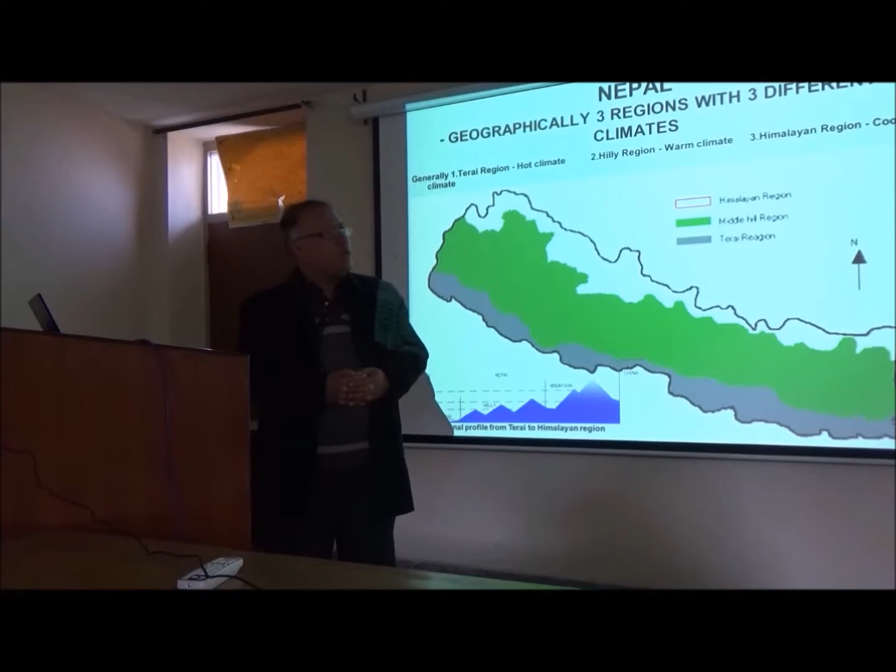Nepal is divided into three geographical regions according to climate. In the south we have the hot climate with the Terai region. In the middle we have the hilly region with warm climate. In the Himalayan area in the north, we have cool climate. So geographically, we divide according to climate.

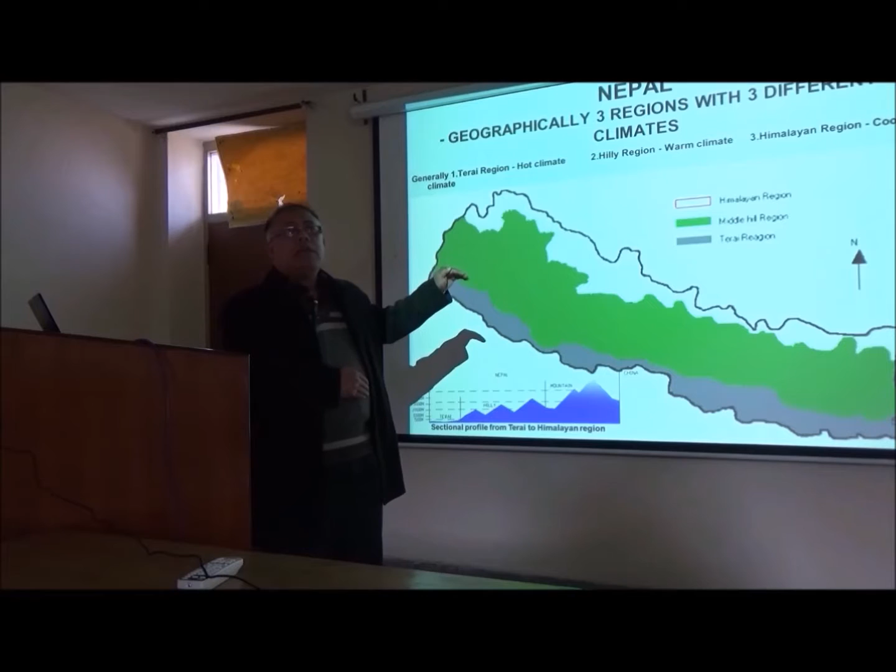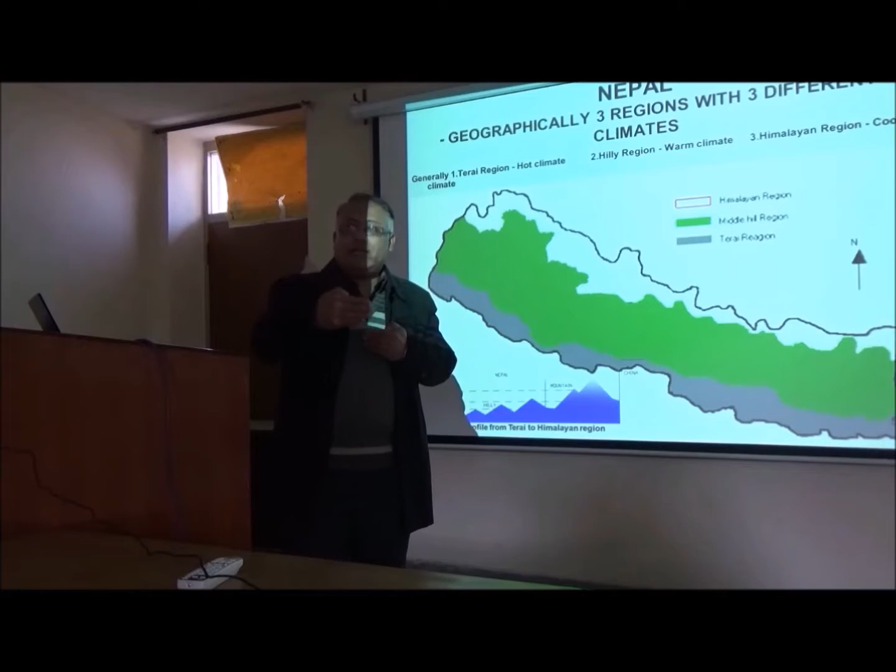If you see the cross section of the country, it's like 150 to 250 kilometers. From the Terai, it's up from 50 to 60 meters from sea level, and it goes up like this to the top of Mount Everest, 8,848 meters.

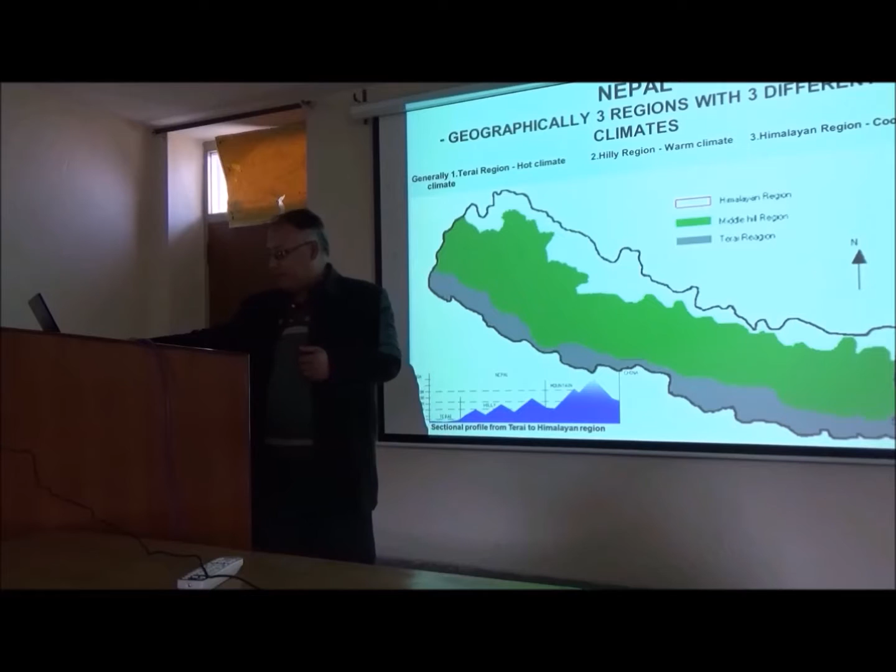So within 150 to 200 kilometers, we have big biodiversity. Different ethnic peoples in Nepal, near to India, near to China, with different cultures, different traditions, different architecture. So we have a composition of different ethnic groups and different architecture, tradition, and culture.

If we see the different regions, Himalayan, hilly, and Terai region, we have different types of buildings. So if we talk about only rural houses, rural buildings, we should concentrate on which area, which region.

In the Himalayan region, you can see in the picture stone buildings with flat roofs. I visited Mustang last time in May - flat roofs, different types of staircases, different settings of rooms. This is the courtyard type of building design.

In the hilly area, especially in Kathmandu, you see big exposed buildings, 2 to 3 to 4 stories, sloped roof with natural material. This is a building in the hilly region in Palpa district, west part of Nepal. This building is made of sun-dried bricks.

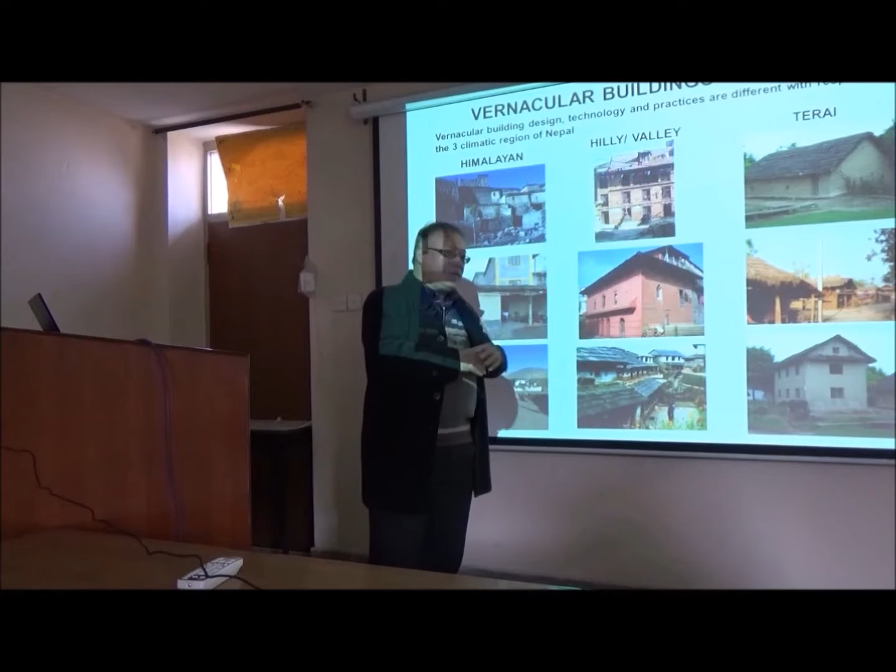This is from the Gurung village, from the west part of Nepal. You can see the roof is slate and the building is like that.

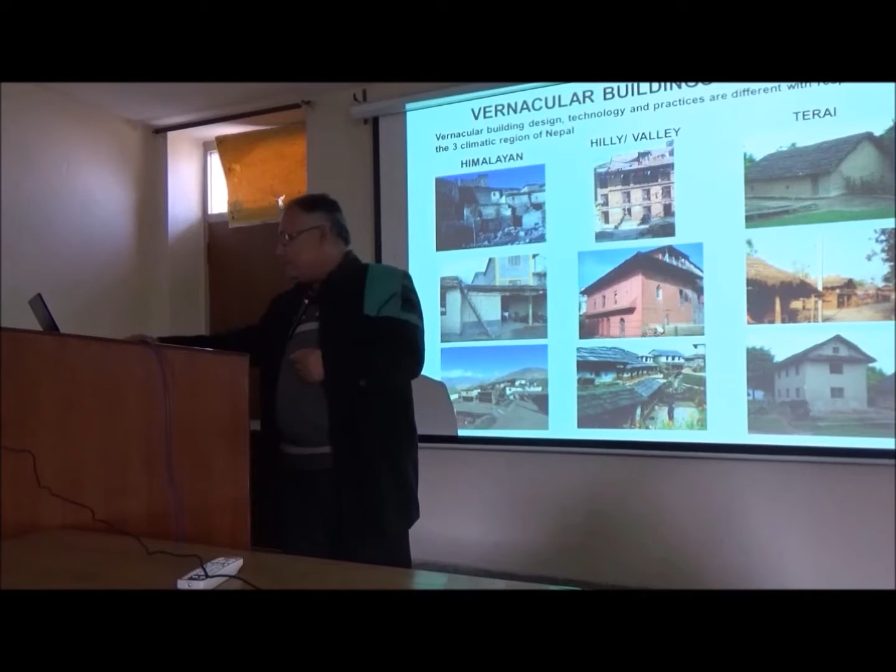And if you see in the Terai region, you can see natural materials like bamboo, straw, mud, etc. This is in the inner Terai side, down south. So we have different types of typology in the buildings according to our region.

So I'm talking today only about the hilly region, rural houses in the hilly region, because we are focusing on the post-earthquake situation. The earthquake affected nearly Kathmandu Valley, only in 13 districts, not all 75 districts. People say all Nepal, all 75 districts were affected by the earthquake, but that's not true. Near Kathmandu Valley, in 13 districts, these districts were affected more.

So I am talking only about the design, technology and green features of rural houses in the hilly region of Nepal. If we see the rural building design in the hilly region, it is nearly 500 to 2100 meters above sea level. It's not very high and not so low, like in the Terai, southern part of Nepal, and the Himalayan area of Nepal.

If we see the rural building design typology, it depends upon the ethnic people of the hilly region. Ethnic people like Newars in Kathmandu Valley, Brahmin and Kshetri from east Mechi zone to west Mahakali zone in the hilly area, Tamang near Kathmandu Valley, Gurung in the west part of Kathmandu Valley, and Magar also in the west part of Kathmandu Valley.

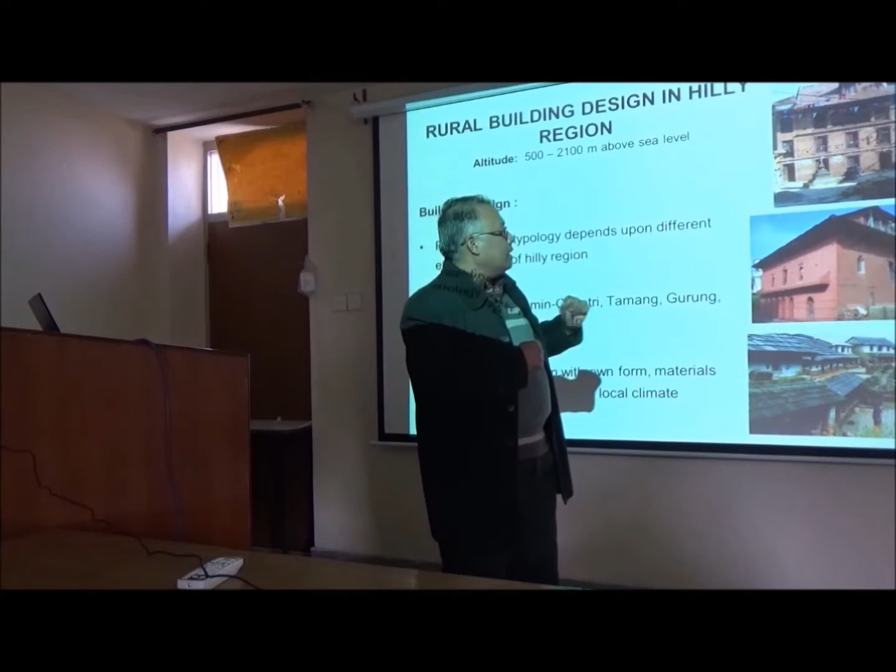So there's a little difference. You can see in the picture, this is the typical traditional building of Kathmandu Valley. This is outside Kathmandu Valley. This is a building from the Gurung village.

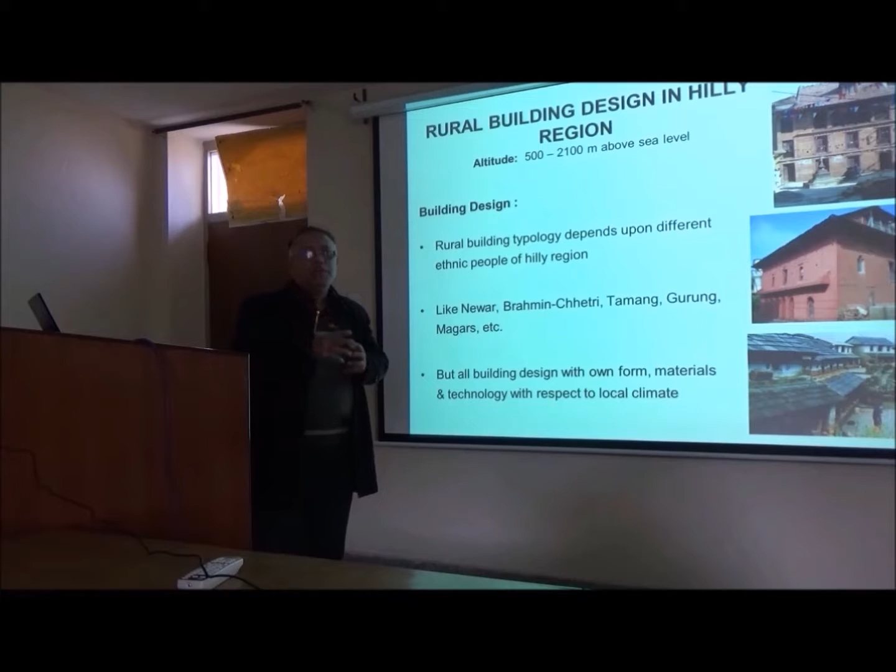So we have a little different design and construction according to ethnicity, according to climate, according to region. In Nepal there are many ethnic groups, but all the building designs have their own form, materials and technology with respect to the local climate, local material, and local people.

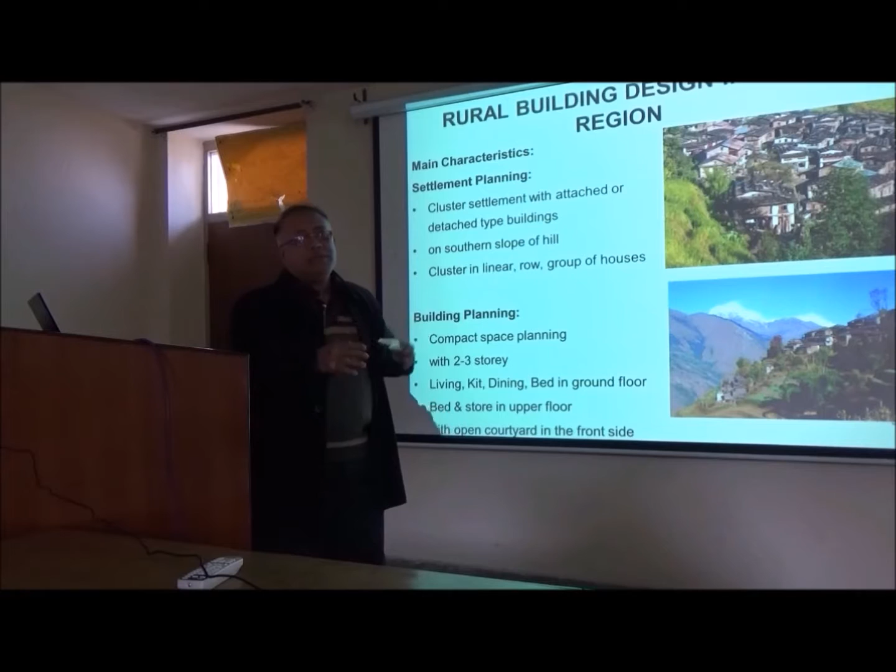If we see the rural building design in hilly regions, the main characteristics of the settlement and building pattern show cluster settlements with attached or detached type buildings. You can see in this picture one of the villages in a hilly area. In the Gurung Magar village, the cluster is grouped very tightly together, but in Brahmin and Kshetri villages, they are a little bit scattered.

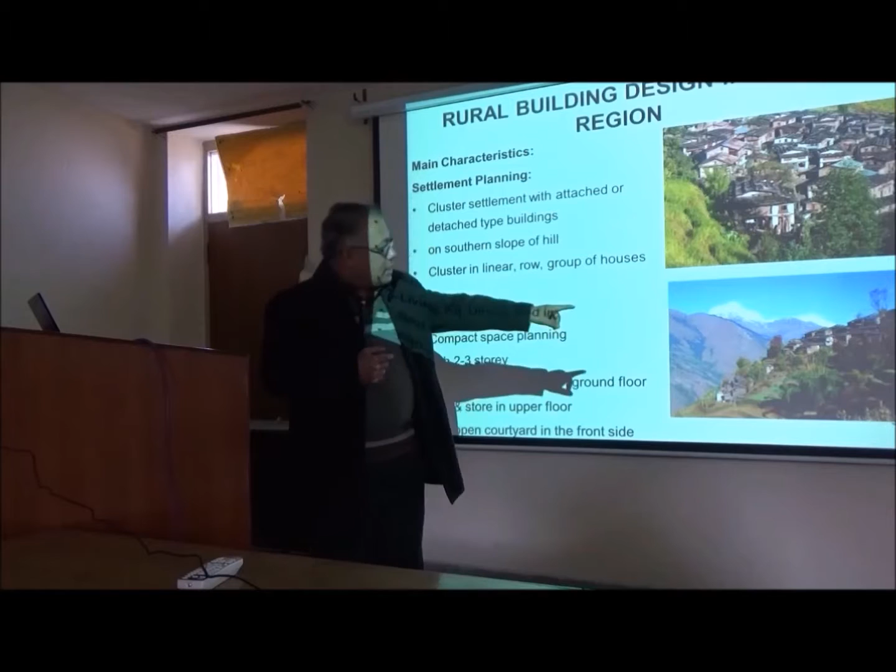They are also in groups, but a little scattered, not like this. You can see in this picture that all the villages are located in the south part of the hill to take sunlight. This is the cluster pattern. Some villages are linear, some are in a row, some are grouped. So we see different settlements according to location, site, and ethnic group in the hilly area.

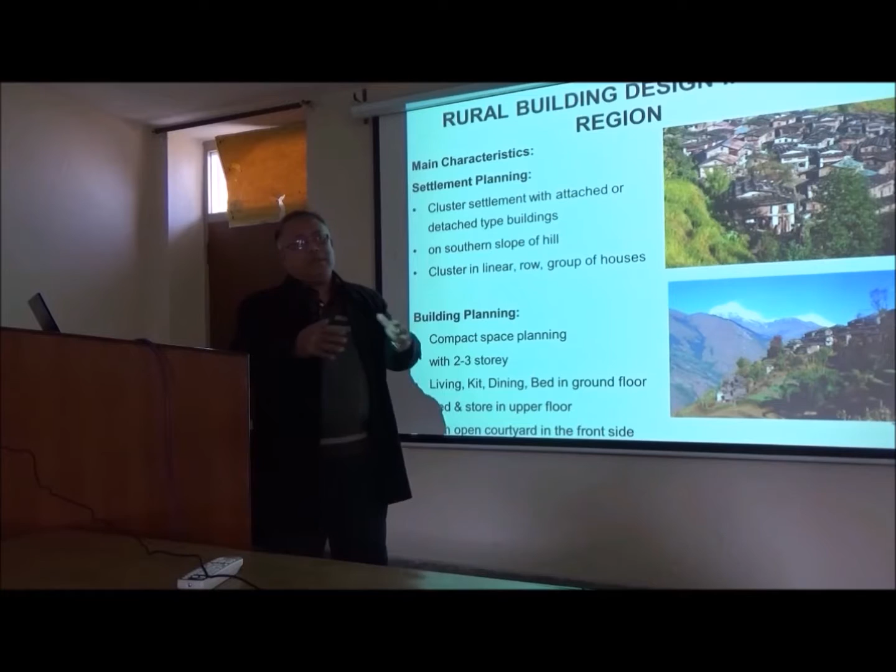In building planning, the hilly area is a little bit cold in winter and warm in summer, but most of the time it is colder, not as cold as in the USA, but colder than the Terai region, colder than the plain region. So we have compact space planning with 2 to 3 stories. Maybe some people have 2 floors, and richer people in the village have 3-story buildings.

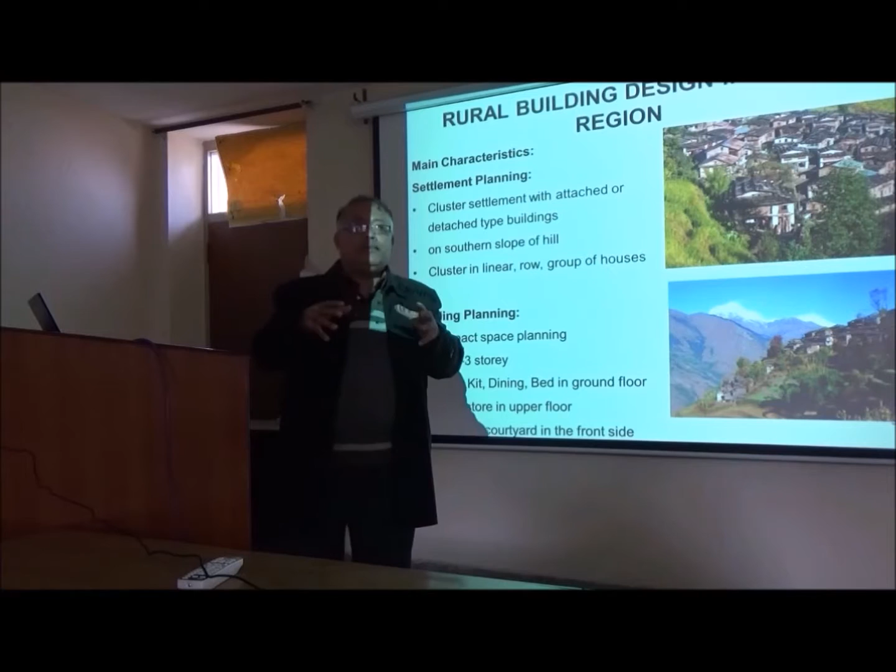So the living room, kitchen, dining, and bedroom are on the ground floor, and they have bedroom and storeroom on the upper floor, with an open courtyard in front. Most people engage in activities in front of the building. They have open space, a courtyard. When people come from other families or neighbors, they talk in the courtyard, not inside. Okay, this is a little bit about the design in rural areas.

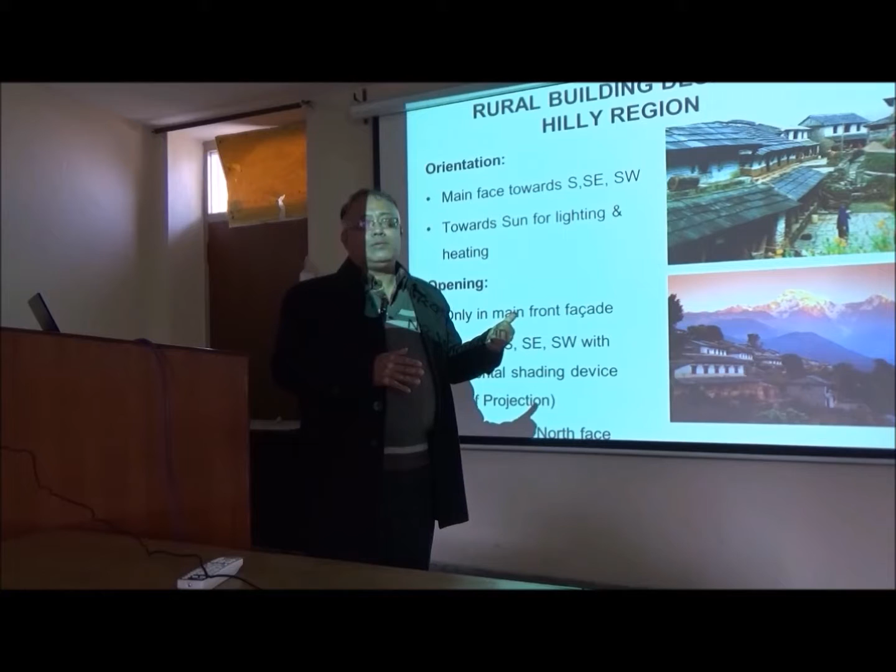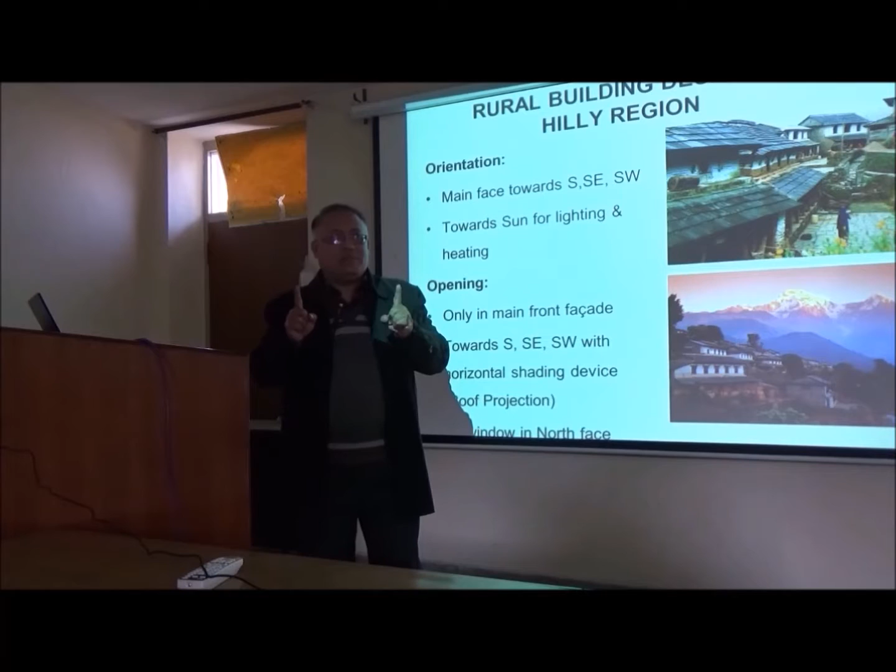If we see the orientation of the building, the main facade always faces south, southeast, or southwest, toward the sun, because all buildings depend upon solar energy. So we say this is passive building, passive solar architecture. The building already faces this way - you cannot see windows in the north part, in Nepal, in the hilly region, in the mountain region, only small windows in the south, but all for lighting and heating purposes.

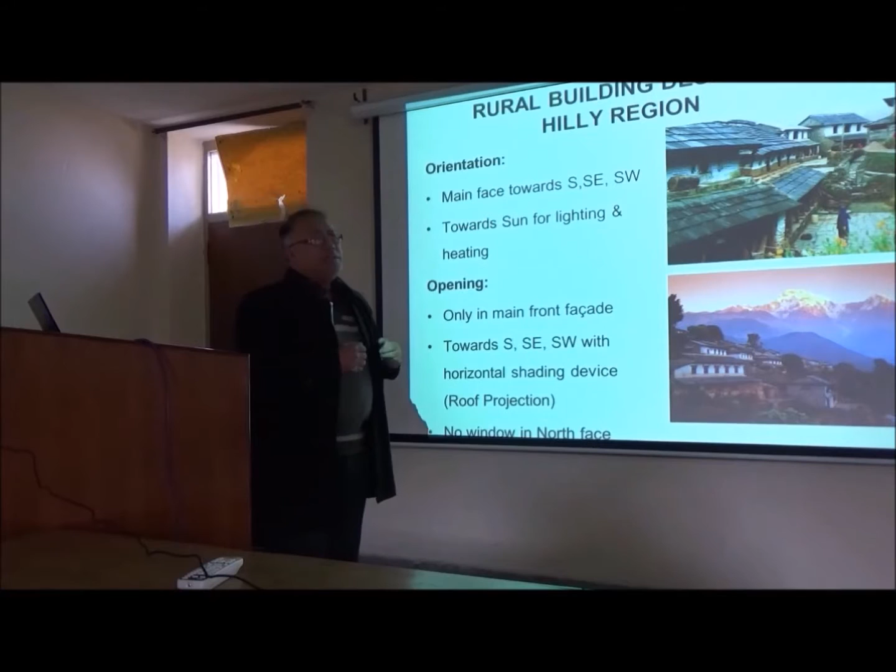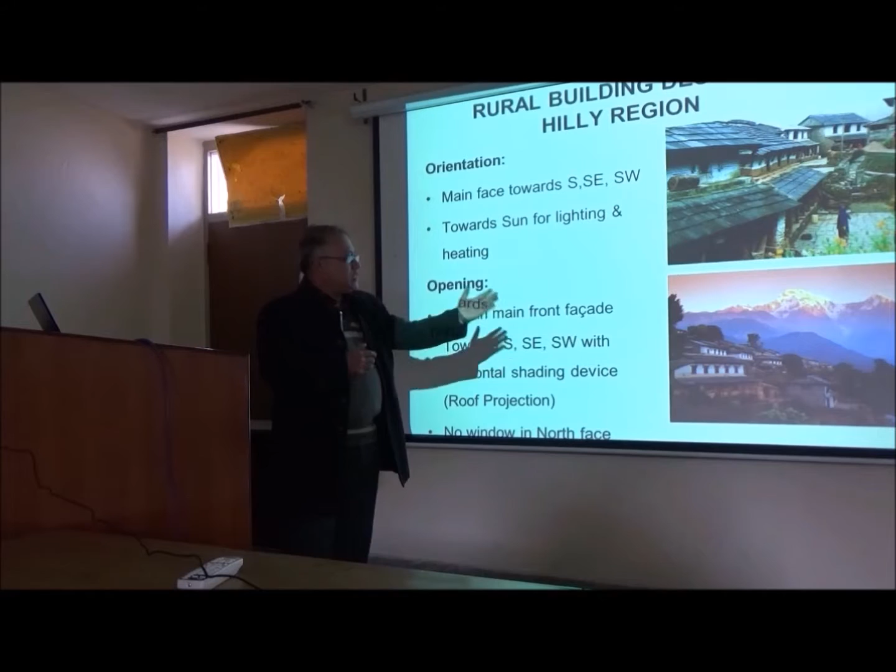This building does not have mechanical ventilation like in the USA or Japan - it's not closed. We always open windows. We have cross ventilation, free ventilated buildings. But in this building we don't need cross ventilation, so we have openings in only one orientation, on one side. You can see in all buildings the openings are only in the main front facade toward south, southeast, or southwest, depending on the location of the building.

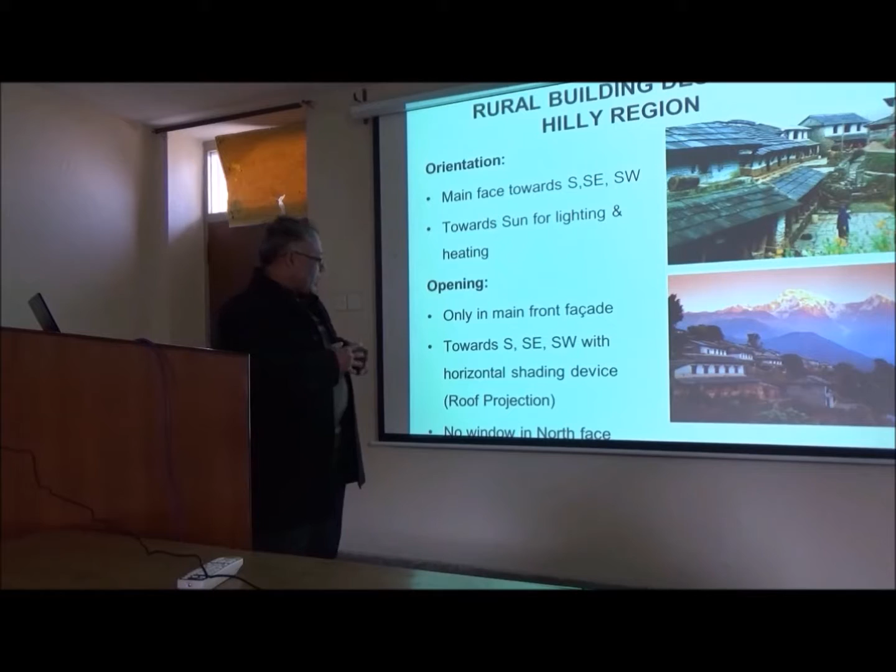And the building always has a horizontal projection of a slope roof. This slope roof will cut off the rain in the monsoon season of June, July, August, as well as the sunlight in summer. You can see some sun-shading devices like that, because in June, July, August we have monsoon season, so the wall and window should be protected from sunlight as well as rainfall. So we cannot see windows in the north part - that is specific to all buildings, all kinds of buildings, in all ethnic groups.

Regarding rural building material and technology, all materials can be found locally - natural materials like stone. Some parts use brick, but not much, and it's sun-dried brick; most buildings have sun-dried brick and timber, which is also locally available. Mud can be found near the site, near the village. Surkhi is the powder of brick used for mortar to join stone or for plastering, and lime is sometimes used - especially if you go to Bhaktapur now, you can see lime and surkhi mortar used in temples and palaces, in high-class buildings.

Otherwise, in local buildings they use only mud. All buildings have thick walls, minimum 30 centimeters, maximum 45, and some buildings have walls up to 60 centimeters thick. So we say these are massive walls, and they attract sunlight.

We say it is the thick wall that works as the thermal mass, because it traps the sunlight, warms, and radiates the heat inside. So if we see the floor height, we check there is very less height in the hilly area.

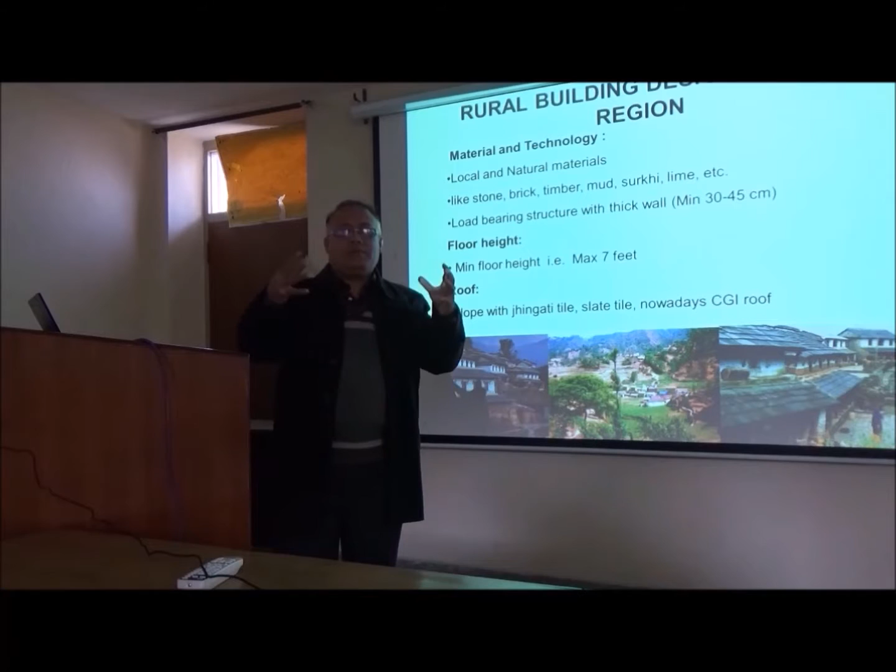In building, maximum 7 feet, because it's cold climate. If you go everywhere, planning is compact and height is less to conserve heat energy. If volume of the building room is high, then you need more energy to heat. So in every part of the world, I saw in Japan and USA also much more compact planning to conserve heat energy, to use less heat energy by active or passive system.

So we have also the same. The roof is sloped with maybe jhingati or slate tile. Nowadays, after earthquake, most reconstructed buildings use galvanized iron corrugated CGI roof. I am very against the CGI roof because it is not climate responsive.

Because when it's summer, it cools; when it's winter, it warms. But in the CGI roof, the climate is opposite: in summer the temperature goes more than outside, in winter also. So I always say that if you use CGI roof, use insulated CGI roof with insulation.

But in the rural area, people do not think about insulation. They just put the CGI roof, that is what they are doing now. Otherwise, we have the thick roof to protect heat from outside in summer and conserve heat in winter.

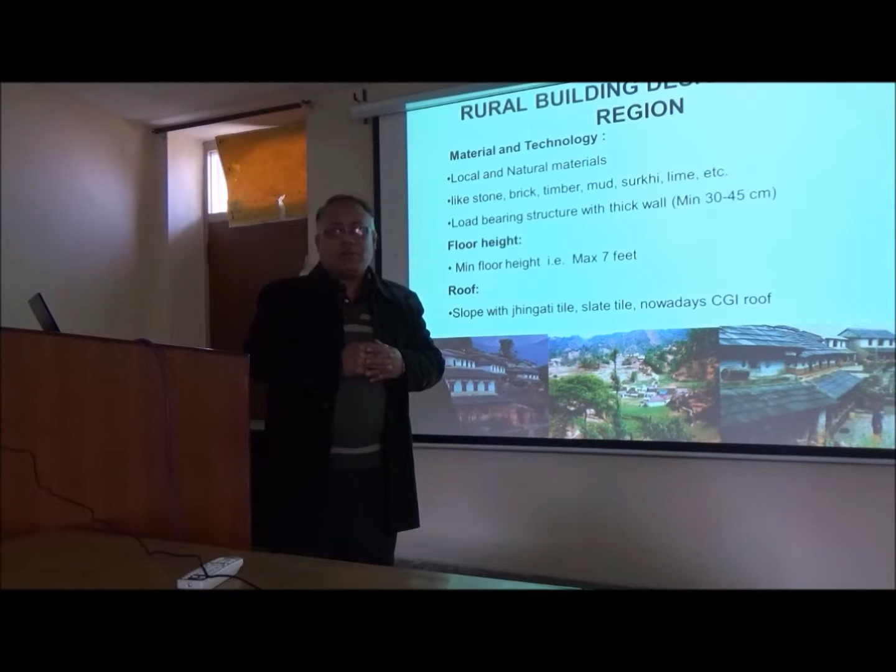So if you see the green features of the rural building, as we say green, it must be environmental benefit. If you check this, all houses are eco-friendly because they use only locally available green materials. They will not use transported material from long distance. They cannot afford it; they use brick if available locally.

If brick is not available, they use stone. This is sun-dried brick used in Palpa district. Other buildings use either brick or stone, and mud mortar, mud plaster, clay tile, timber, etc. This material produces less embodied energy compared to modern materials like cement, reinforcement, concrete, etc.

So less carbon emission material compared to modern building materials. This material does not need to be transported from long distance. That is why it has environmental benefit.

So we save the environment if we use local, traditional material. We have also number 2, social benefit. People think that in Kathmandu or outside the Kathmandu Valley, especially old people say this traditional building has good thermal performance compared to modern building.

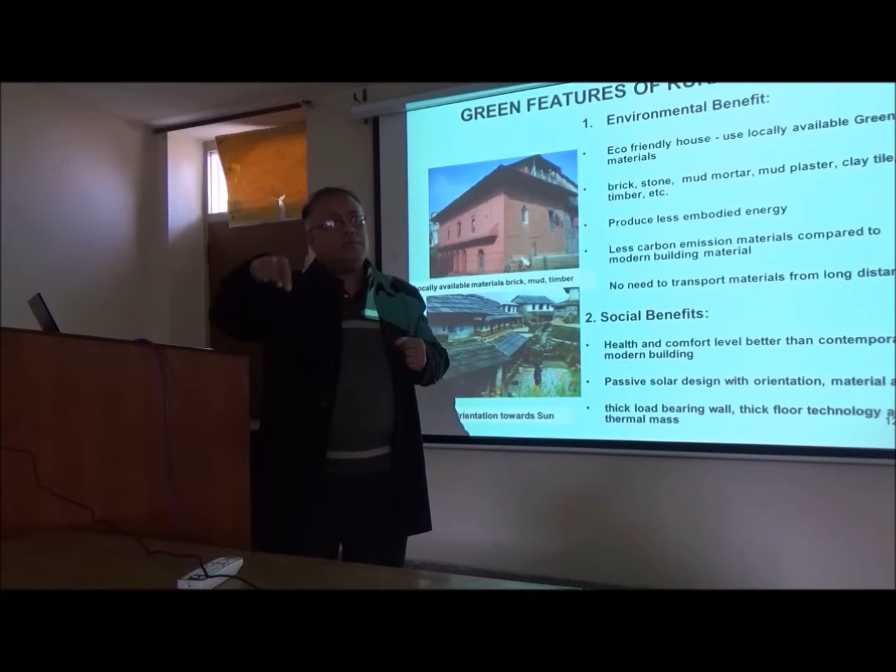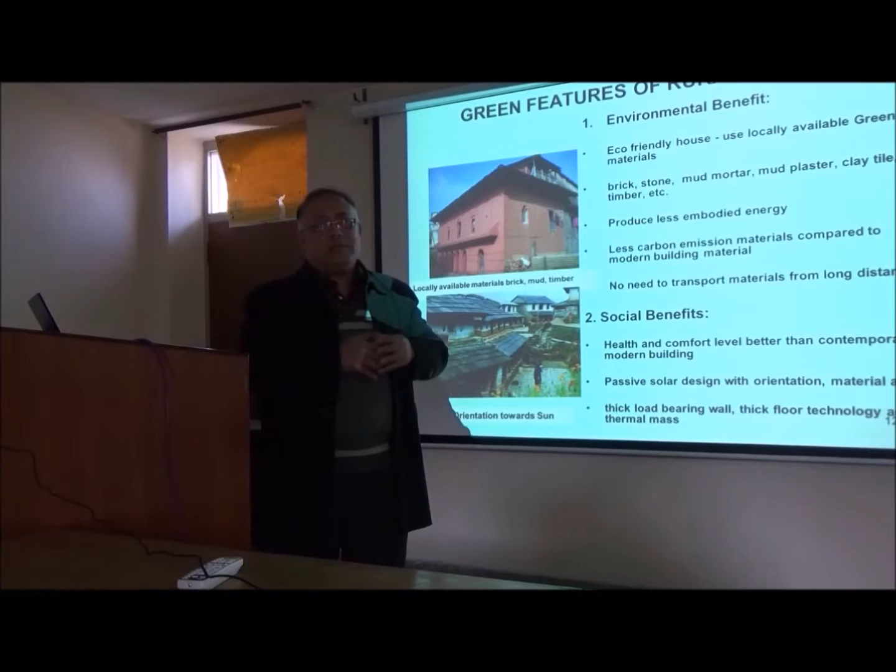People go into the big hotel, they go inside and they cannot sit comfortably. So they came back to the traditional building, and they can sit in the traditional building compared to the modern building. So this is the failure rate in the contemporary buildings, especially hotels in Mustang, in Jomsom, and in different villages near the trekking route. That is the observation when I went and got it, as I mentioned, this is my research.

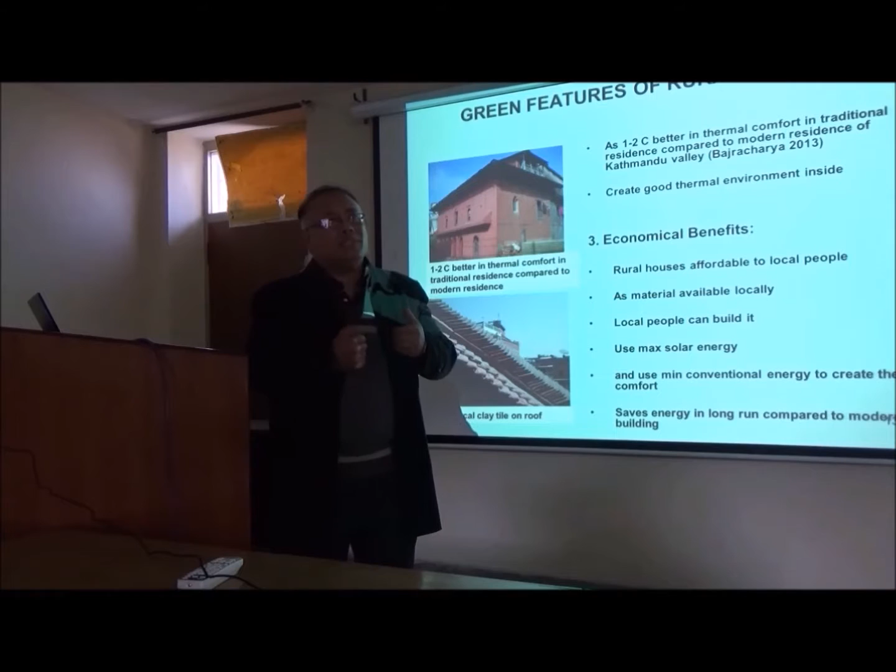This building creates a good thermal environment inside. Nepalese people do not warm their buildings. Last time I had a professor from Tibet University, and we went to Pokhara, Kathmandu and different parts. They said that in Tibet, Lhasa, they now come on vacation because it is very cool there. They came here in December and they said, do you feel okay? For us it's like summer outside. But when they went to the hotel, they said it felt very cold. I asked them why, since you are in Lhasa where the temperature is lower than here. But they told me, we warm our house. In your country, in this hotel, you don't have a warming system, so we feel a little cold. So that is the problem.

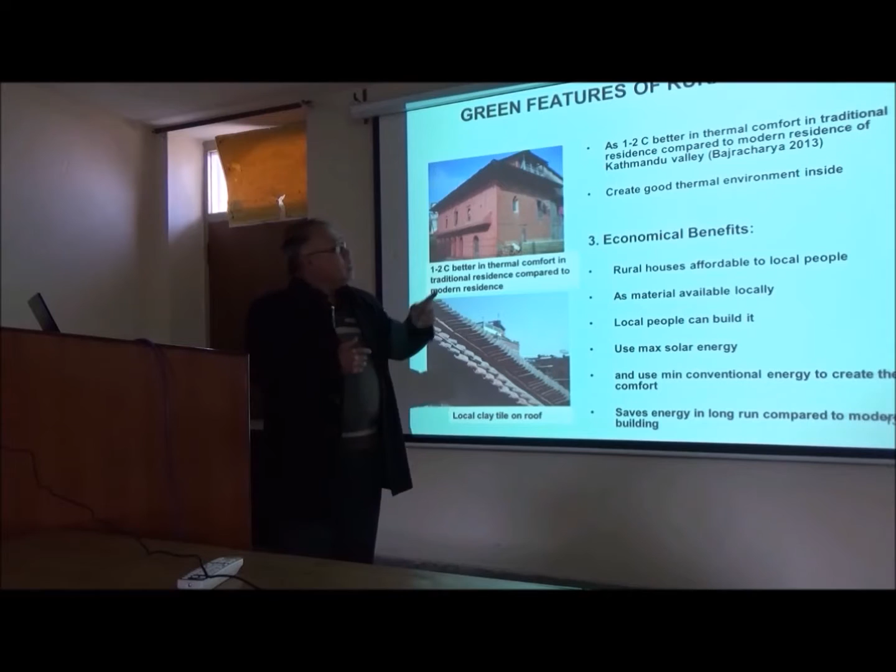Heating, but with this type of building, if you heat it - we don't normally heat it, but if you heat it a little, it warms up. In Mustang also, they use fire, but it doesn't need to run 24 hours, it only needs 3 to 4 hours. Then the heat is generated and the thermal mass absorbs heat and it warms up very fast.

The next point is that this building is green because it also has economical benefits. Like this building, people can afford it. They cannot afford modern materials like cement, concrete, or reinforcement bars, which need to be transported from long distances. In rural areas the transportation cost is very high compared to Kathmandu Valley. So the material is locally available, and people can build this building with their own knowledge.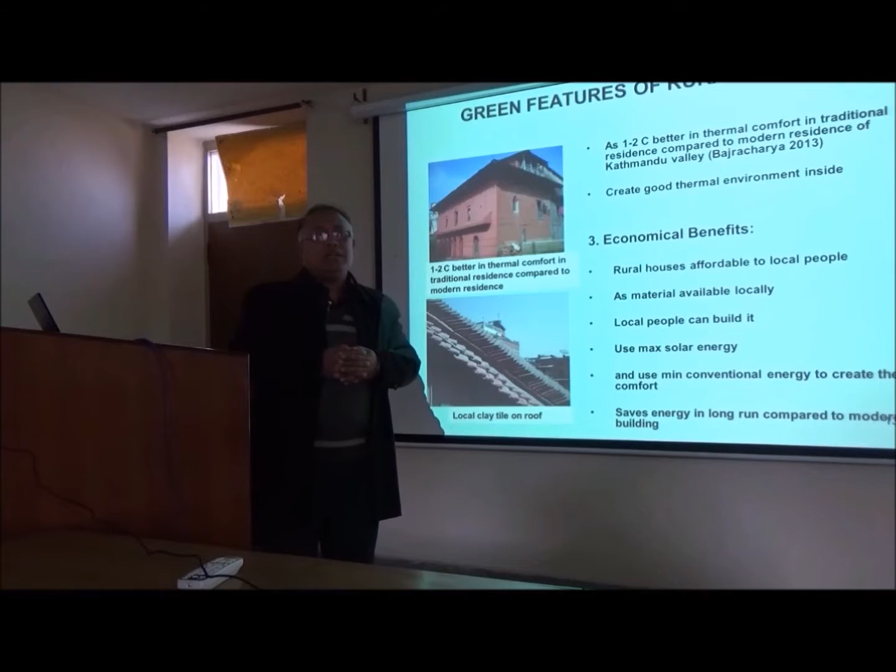So this building typology orients to the south and builds with less floor height. They use maximum solar energy, and use less conventional energy for heating, by petrol, diesel, etc., to create thermal comfort. That means they save energy for heating and cooling. I think for cooling they don't need any energy in summer in these buildings.

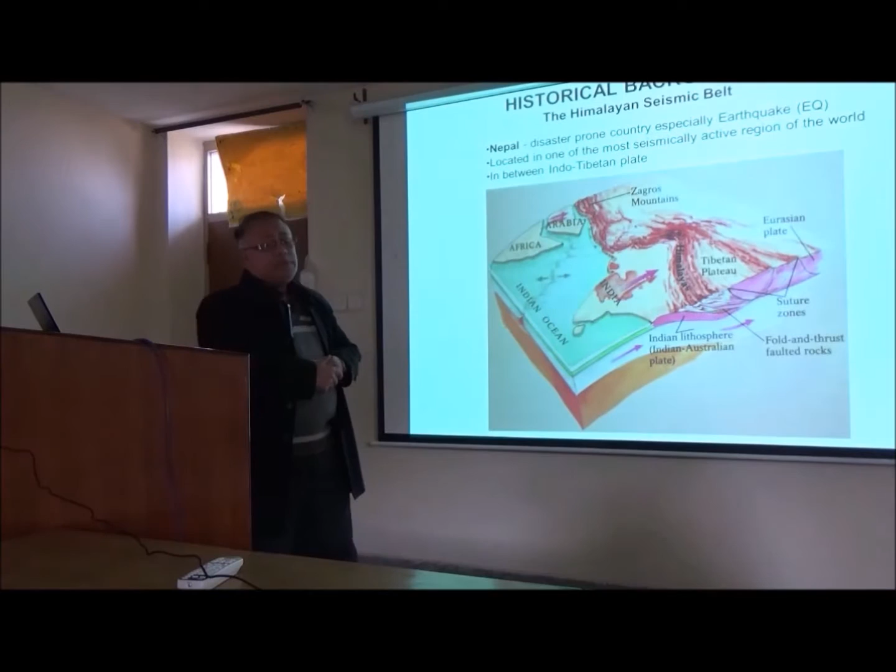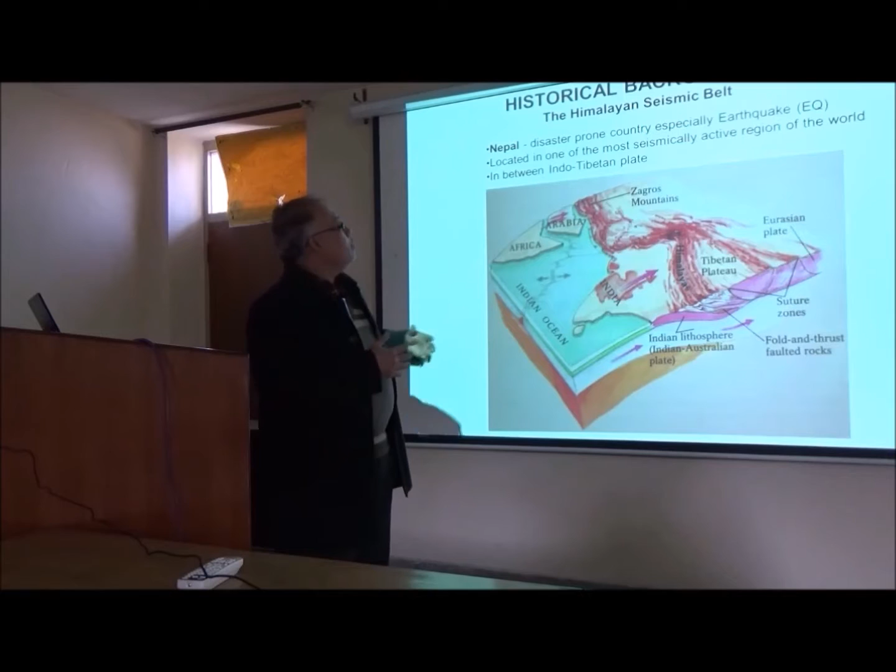If we look at the earthquake's historic background, the Himalayan region is what we call the Himalayan seismic belt, because on these two sides, the Indian plate and the Tibetan plate always have different activities. So we are one of the most seismically active regions in the world. Seismic experts say this is in the 5th zone of the world. It lies between the Indo-Tibetan plates, which always have geological problems between them. So Nepal lies here - people also say we have many mountains, the Himalayas, because of this Indo-Tibetan plate.

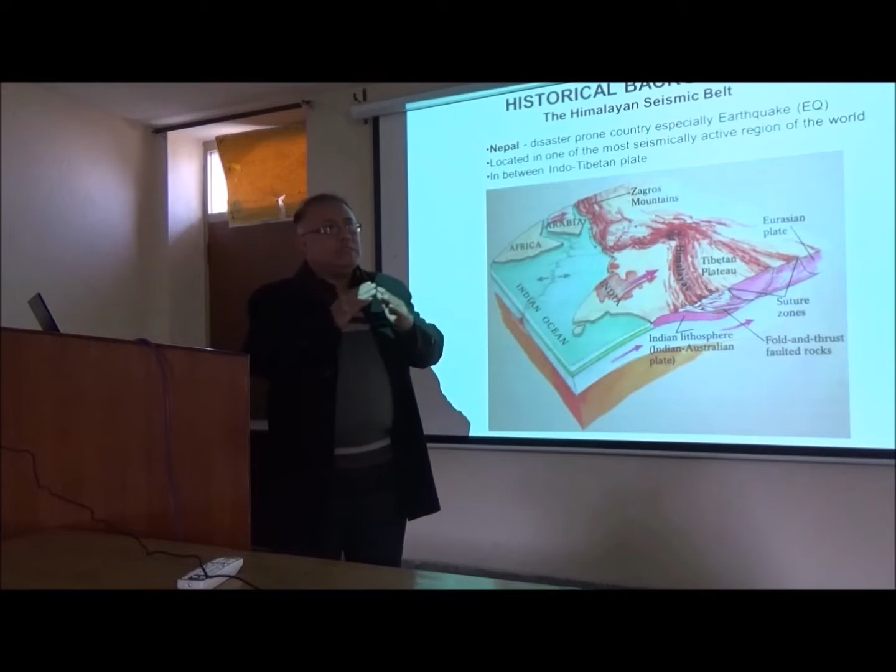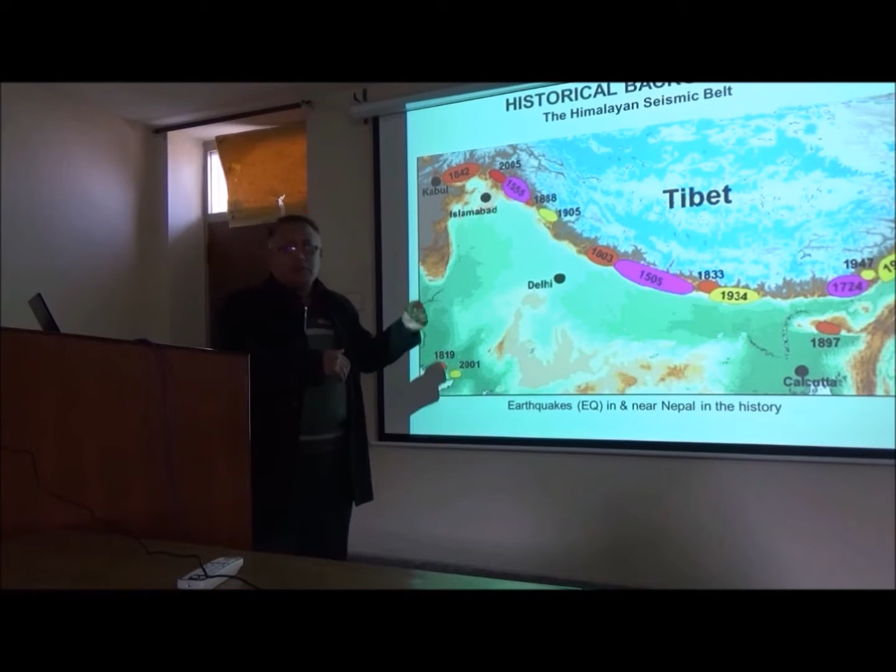If we go back to the historic background, this is India, this is Tibet, China, across different time periods. We have had different types of earthquakes in and near Nepal. This data is from our ministry, and this is data from Wikipedia. If we go back to the 13th century, we had also a big earthquake, but we don't know its magnitude. But based on our data, nearly every 100 years we have an 8 Richter scale earthquake, and nearly every 50 years we have a 5 to 6 Richter scale earthquake in Nepal.

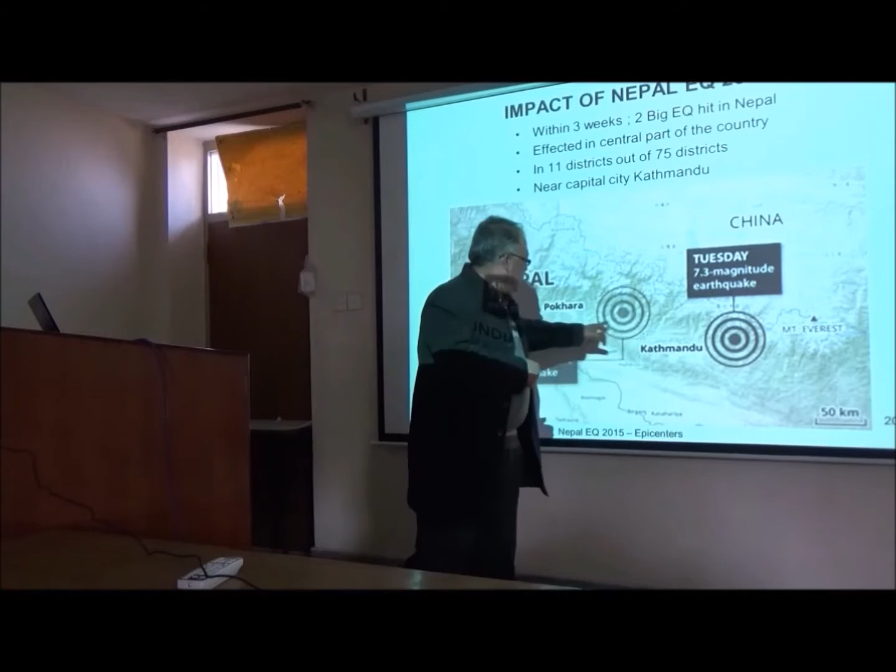So within 3 weeks, we had 2 big earthquakes. This affected especially Kathmandu and Pokhara. The first one was from Barpak, the west part of Kathmandu, and the second from Sindhupalchok. These 2 earthquakes affected only 11 districts out of 75 districts in Nepal.

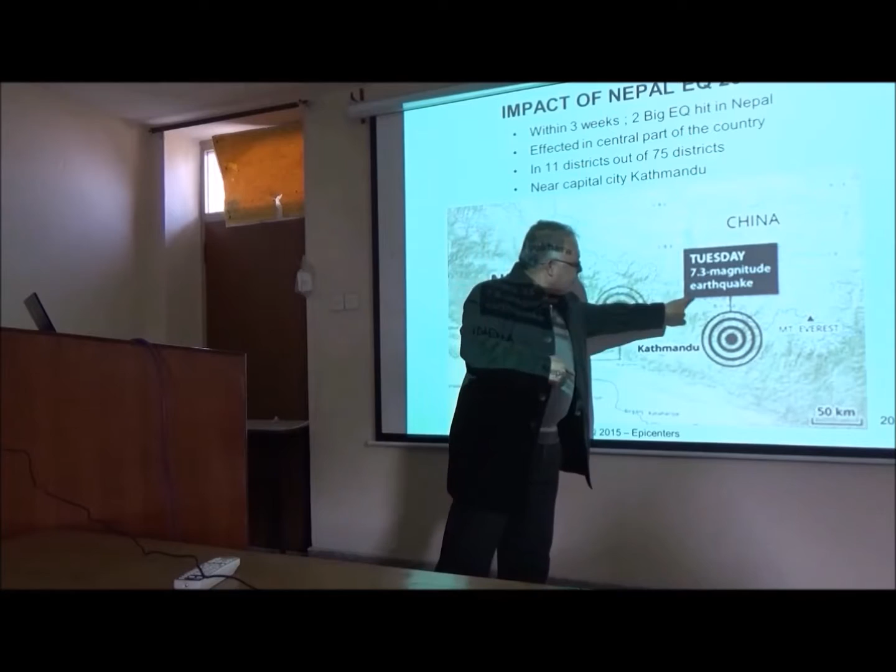I was in Pokhara when the first earthquake hit, but I didn't feel it so much there. When I came back to Kathmandu after 2 days, many aftershocks were happening, so there was scarcity. Most of the earthquake damage and affected area was near Kathmandu Valley.

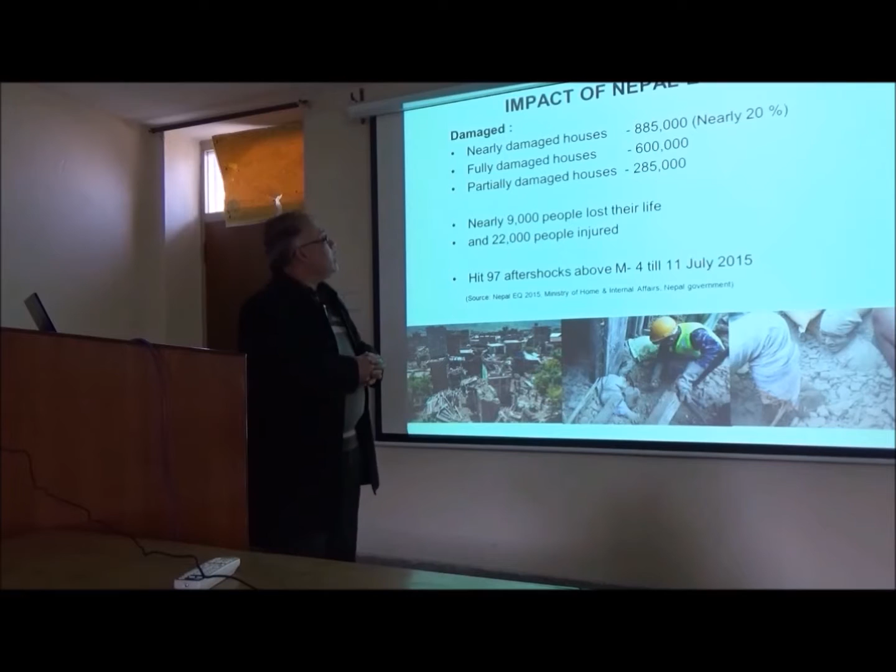According to our Home Ministry, nearly 885,000 houses were damaged - that's 20% of the total households in Nepal. Fully damaged houses numbered 600,000, and partially damaged houses numbered 285,000. Nearly 9,000 people lost their lives, and 22,000 people were injured. There were 97 aftershocks above magnitude 4 recorded until 11 July 2015.

So these are the pictures after the earthquake.

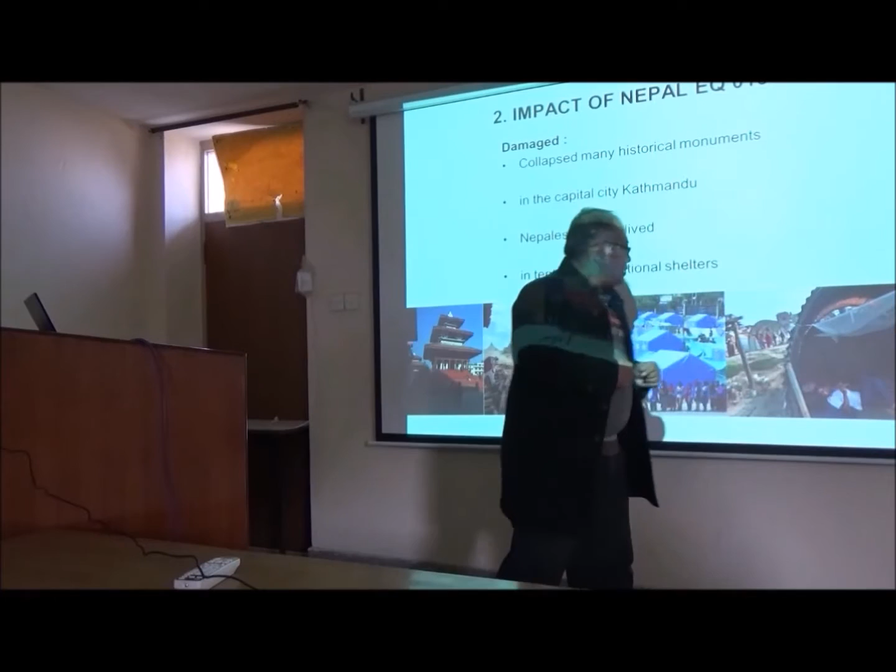Many historical monuments collapsed in the capital city, Kathmandu. Many Nepalese people lived in tents - this is a tent in Tundikhel, in the center of Kathmandu Valley. Also people lived in transitional shelters like this, in different parts of the country.

This is the historical damaged monument in Swayambhu. This is the palace in Kathmandu Darbar Square. This is Patan Darbar Square. This is the institutional building, the university building of Tribhuvan University - the main building of Tribhuvan collapsed.

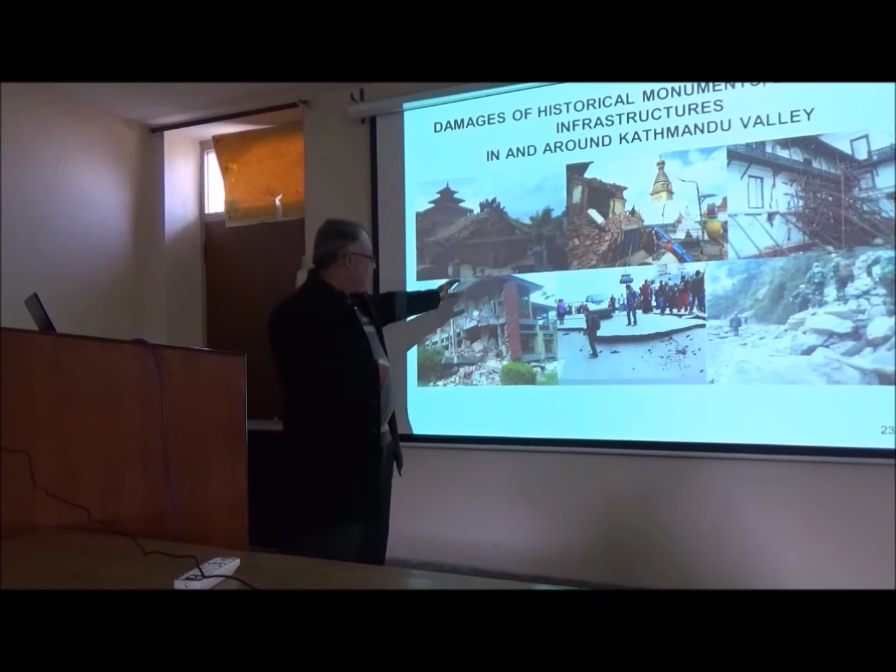This is the highway, in the rural area. We also had landslides and damaged infrastructure in and around Kathmandu Valley.

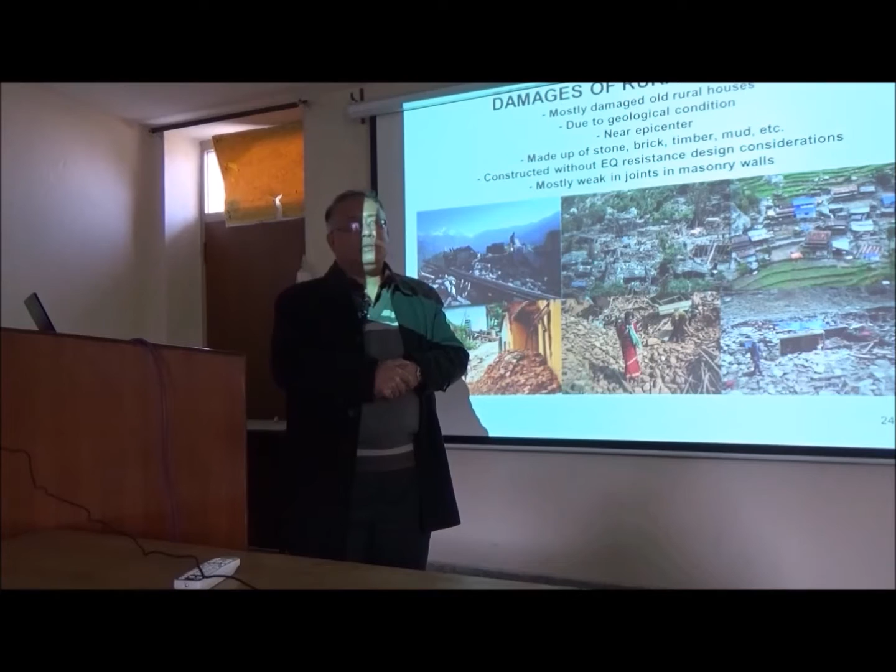Most of the damage was in rural shelters. If you look at the data, in Kathmandu nearly 2,000 people lost their lives. In Sindhupalchok district, also about the same number. But if you compare the population, it varies by 10 times.

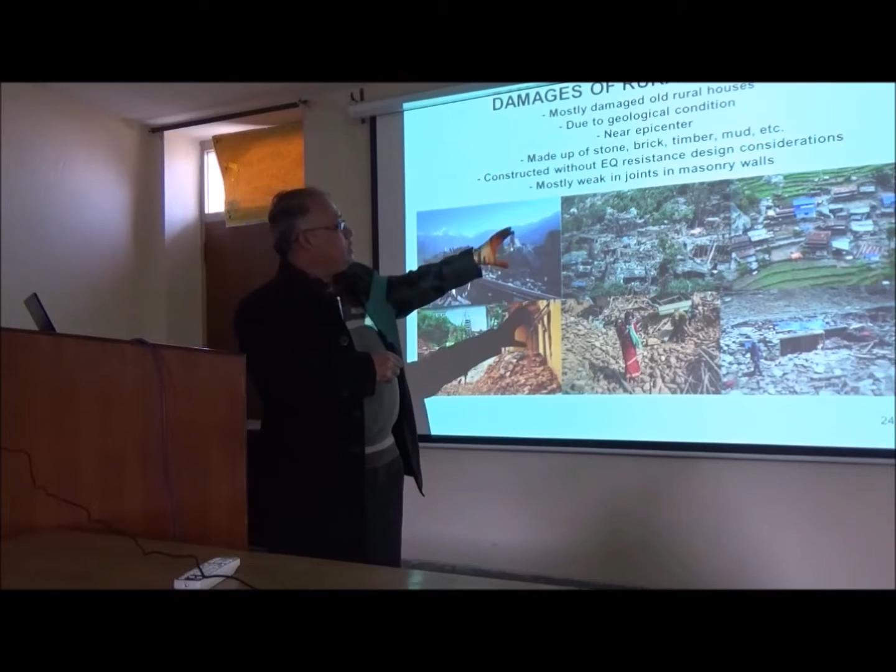So in the rural area, mostly the old rural houses were damaged. You can see all the old rural houses, made of brick and stone, were damaged due to the geological condition and proximity to the epicenter - in Sindhupalchok, Dhading, Nuwakot, which are near the epicenter. These buildings are made of stone, brick, timber, mud, etc.

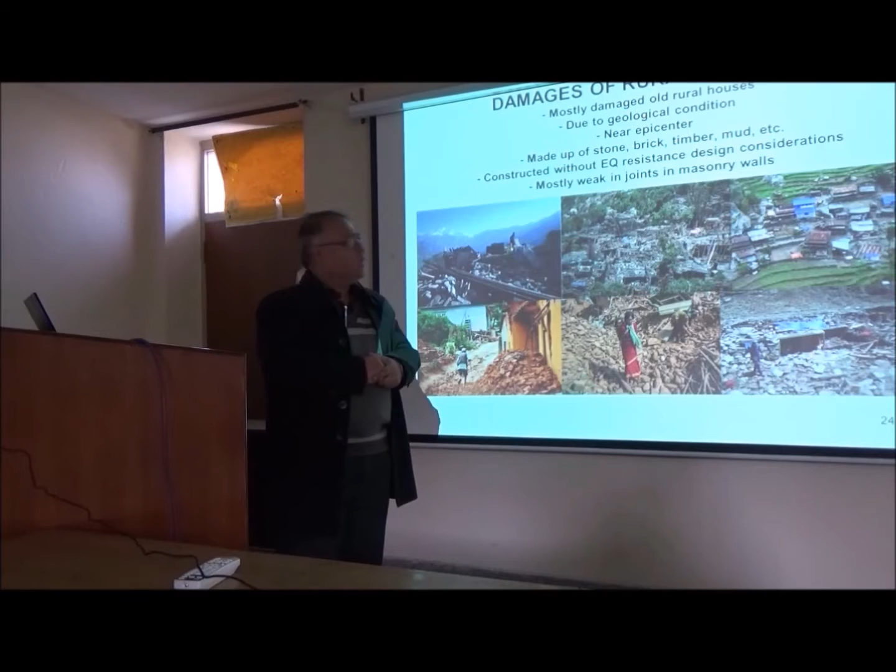These buildings were constructed without earthquake-resistant design consideration. There are weaknesses in the masonry walls, especially in rural areas. If you check, they used rubble stone without mortar, and built masonry walls without considering earthquake design.

They built without any knowledge of earthquake resistance because local people, the owners themselves, built it. In villages, unlike in Kathmandu, it's not built by masons or carpenters - they build it themselves. If we train them how to build properly, they can construct earthquake-resistant buildings.

I will show how to build, and how our students already built one earthquake-resistant building in Sindhupalchok. So that's why if you see why these buildings collapsed - there are weaknesses in the joints and weaknesses in the masonry walls.

But if you compare with concrete buildings - for example, one building in Kathmandu, a concrete building, had many people, more than 50 people in just that one building. That building collapsed like a pancake after the earthquake - only rubble left, nothing. Many people lost their lives in just that one building.

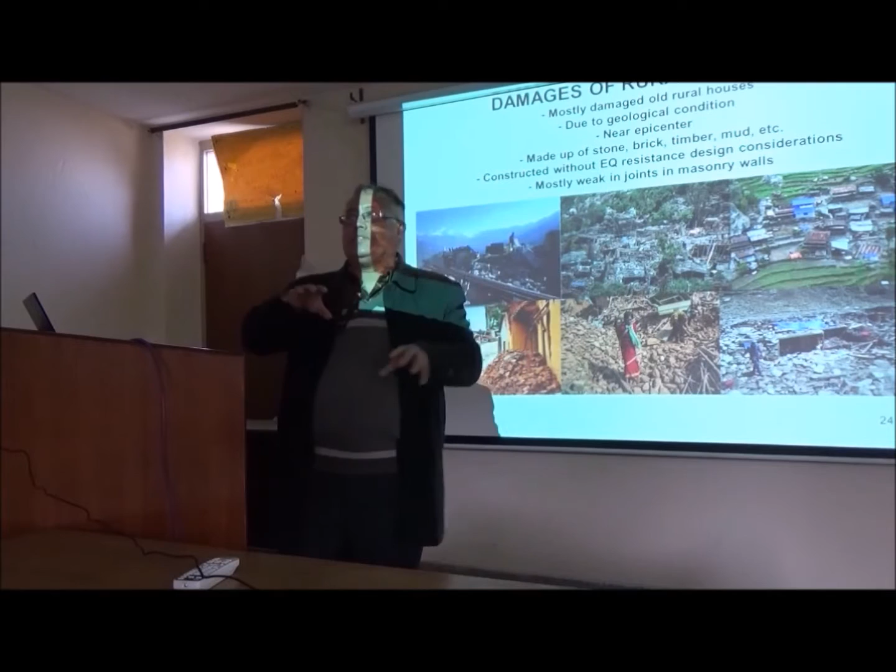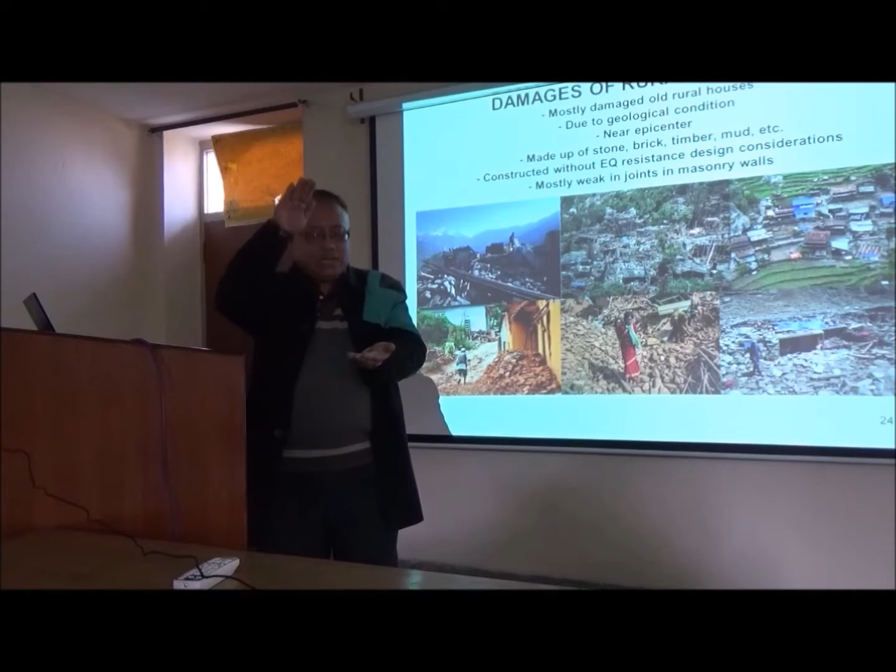You can go and see - in Khokana many buildings are partially collapsed, not all. But if you go to Chuchepati in Kathmandu, you cannot see the building now. After the earthquake, this building looked like a pancake - nothing is left. In that building, many lives were lost.

So people say concrete buildings are better. We say no - life loss is high in concrete buildings if they are not designed according to earthquake resistance standards. Traditional rural buildings are actually safer in that respect.

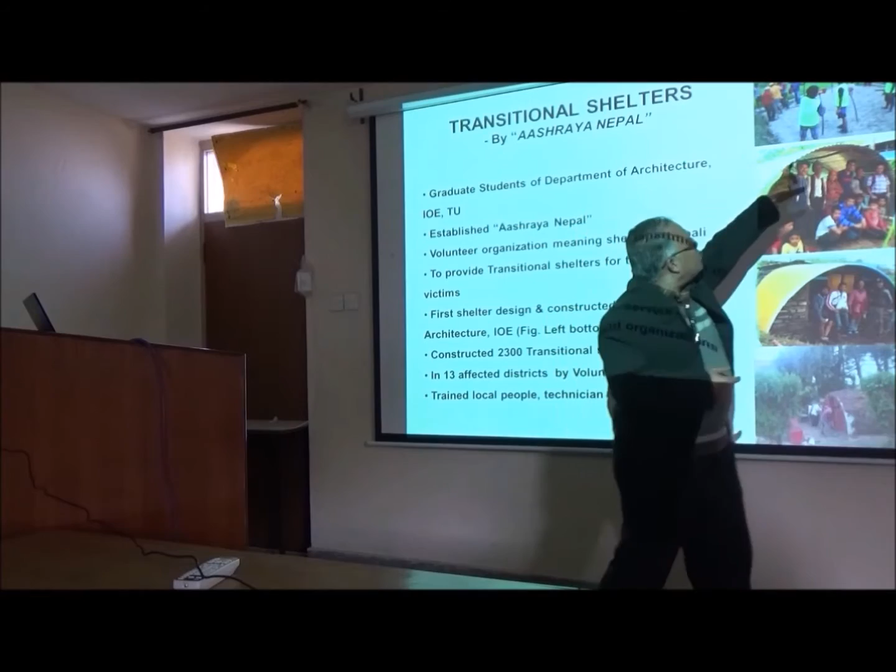One of you are also there. Sudip, which one? This one? No, where is this? It's in Sindhupalchok, Majigaon. That's the place where the guy gave the presentation about the CSEB blocks. But that's the same village. How long did you spend there? About 20 days, 4 days there.

On Sunday, okay. They did this type of building, and this building, they not only built it, they built it as a model. They trained local people, the local organizers, and the local technicians. And this building, this transitional shelter, was copied all over Nepal.

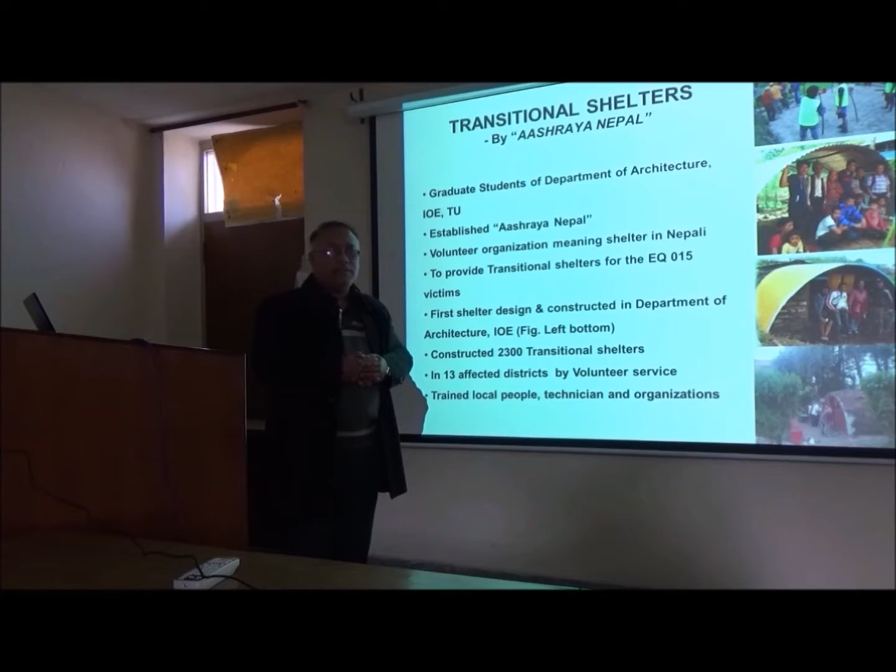You can go on the highway, you can go to villages, you can see it. Because they came here first. First of all, they built this in our Department of Architecture. People came here when we did an exhibition; they saw the walls, asked questions, went with them, were trained here and in the villages, and copied the design. So they constructed 2,300 transitional shelters in 13 affected districts voluntarily. This was the first step after the earthquake.

Then we had many mitigation programs in the past and after the earthquake. I already said our government formed the Nepal Reconstruction Authority, NRA. Our institute, and the Society of Earthquake Technology, an NGO, also did a few mitigation programs after the earthquake. Our institute has already started the MS program in disaster, and our institute did RVA, Rapid Visual Assessment Program. Our government did public awareness programs through media, announced an official earthquake day on 16 January.

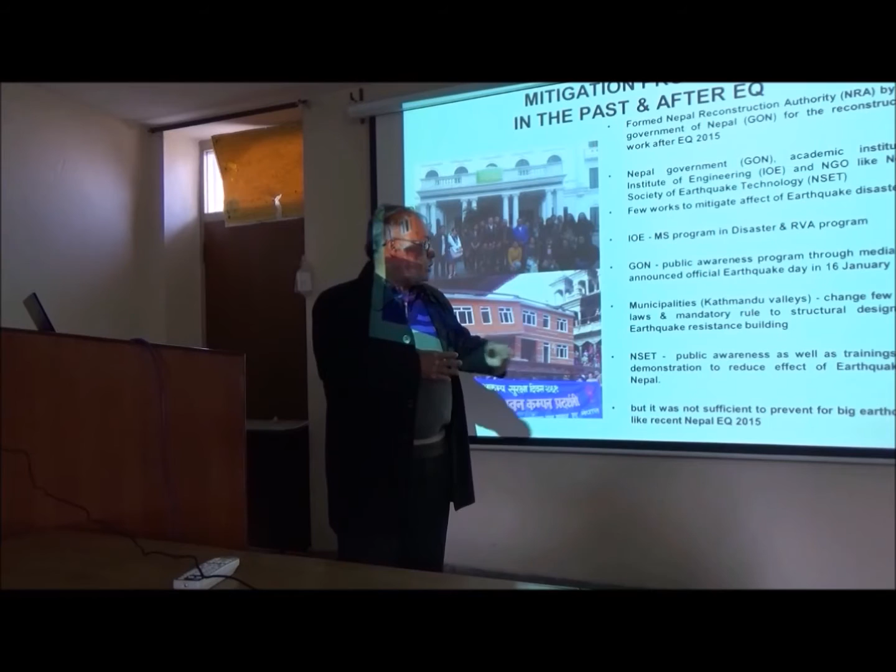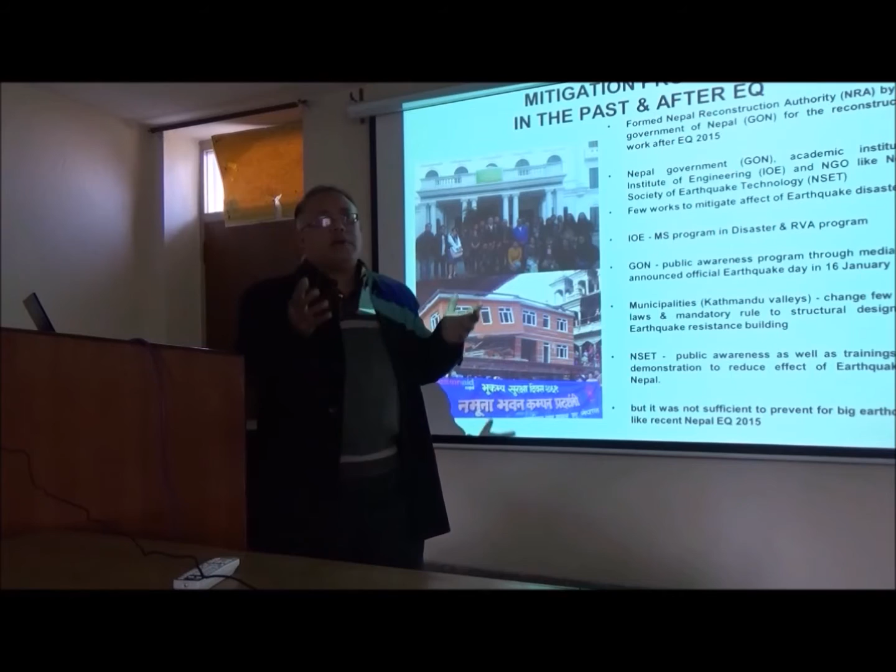Our municipality changed bylaws for earthquake-resistant buildings. NSET, the NGO, also ran public awareness programs like this. The day after tomorrow is Earthquake Day in Nepal, remembering the earthquake on 2nd Magh in the Nepali calendar. They demonstrate, but I think this is not sufficient, because experts already knew we would have a big earthquake, but local people, general people, were not aware of this.

The experts knew and had already forecast Nepal would have a big earthquake, but people did not believe it. So this is Earthquake Day on 16 January, for the awareness demonstration program in different places. You see this demonstration for earthquake awareness in Darbar Square in Kathmandu. This is the training program, also in Mangal Bazaar I think, this program in the square in Mangal Bazaar.

So they have done a lot of awareness programs before the earthquake also. They also wrote manuals and trained masons how to design and construct earthquake-resistant buildings, but that is not sufficient. The masons are very few, only in Kathmandu Valley.

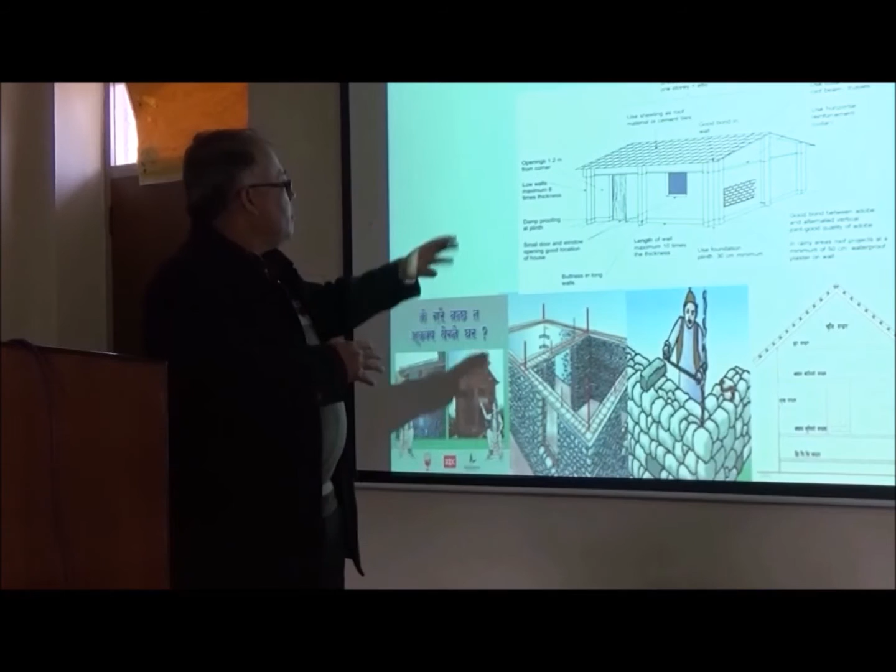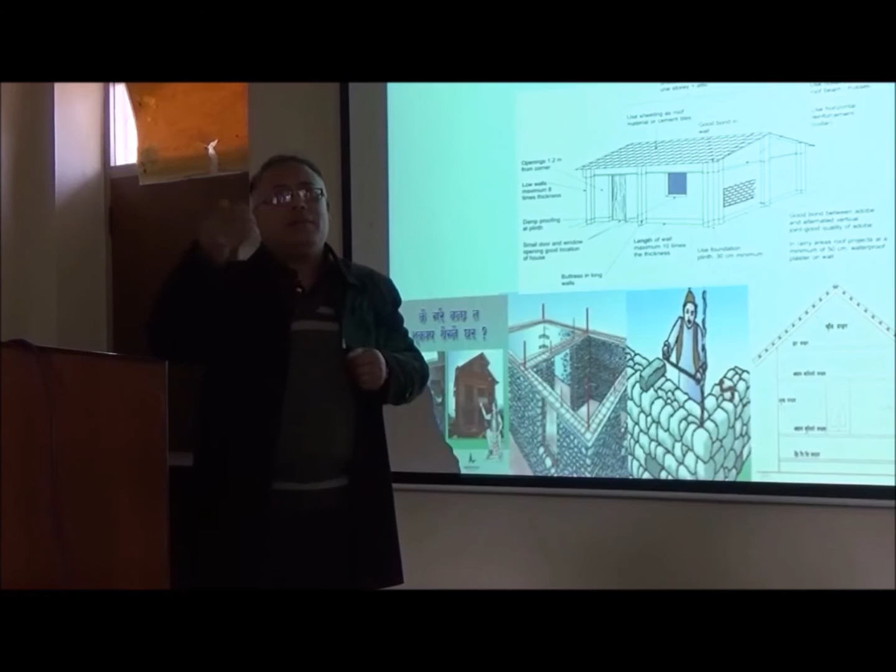So they also did training with sketches and books on how to design and construct rural buildings with stone masonry, how to tie up corners. If you do not tie up, then after an earthquake this will happen, so you need to tie up at the gable end. All this kind of information was passed on, written, and taught to people, but not for everyone, only for very few people.

So now I want to show the demo rural house designed and constructed by our students, by Aashraya Nepal, with the help of professors from the Department of Architecture and with the help of Tokyo City University. So this is one of the demo buildings.

This is designed and constructed in the Lishankhu VDC in Sindhu Palchok, Nepal. Sindhu Palchok is one of the highly affected districts after the earthquake.

So this is the design. This is the pilot project. It is already completed, just completed.

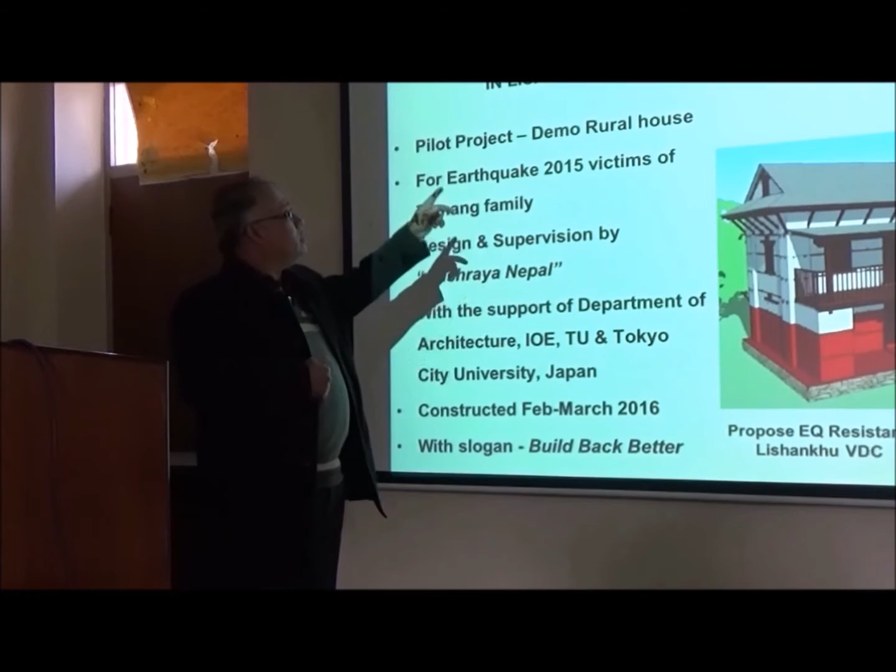This is a demo rural house, showing how to design an earthquake resistant building in rural areas with the participation of the community, and it has already been handed over in this Tamang village. The owner is a Tamang family.

This was designed and supervised by the Aashraya Nepal students, who sometimes come and consult with us. The Department of Architecture and Tokyo City University were also involved.

We also financed 30% for this building, and there was a function to start this building in our department.

This building was constructed within 2 months, because the villagers were ready to design and construct. They already collected the materials.

Our students from Aashraya Nepal went from time to time to supervise and guide them, with the slogan 'Build Back Better.'

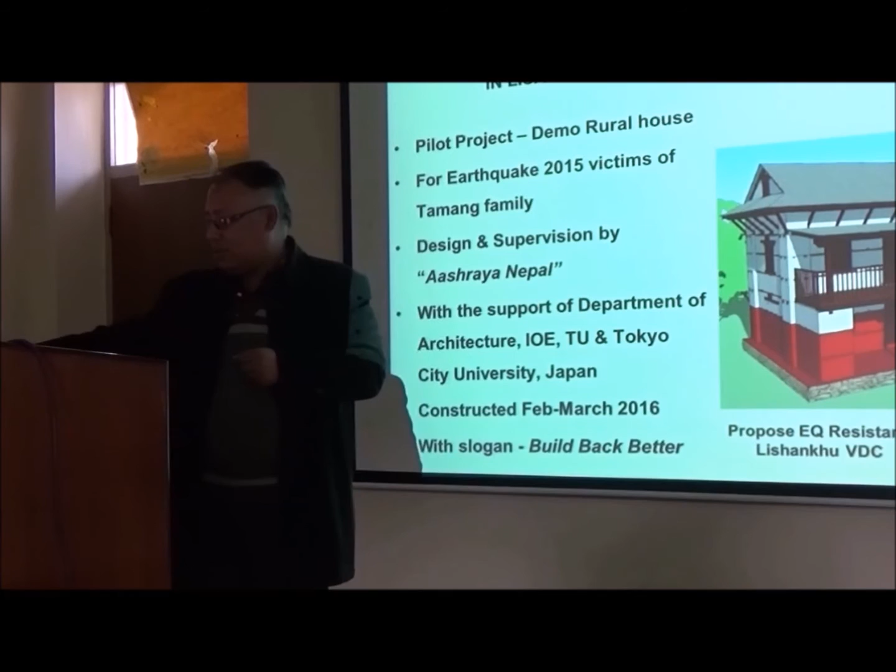I will show photographs of this building. This is the design, based on the traditional rural building form, a rectangular plan of 8.4 by 6.4 meters, with 1 to 3 stories.

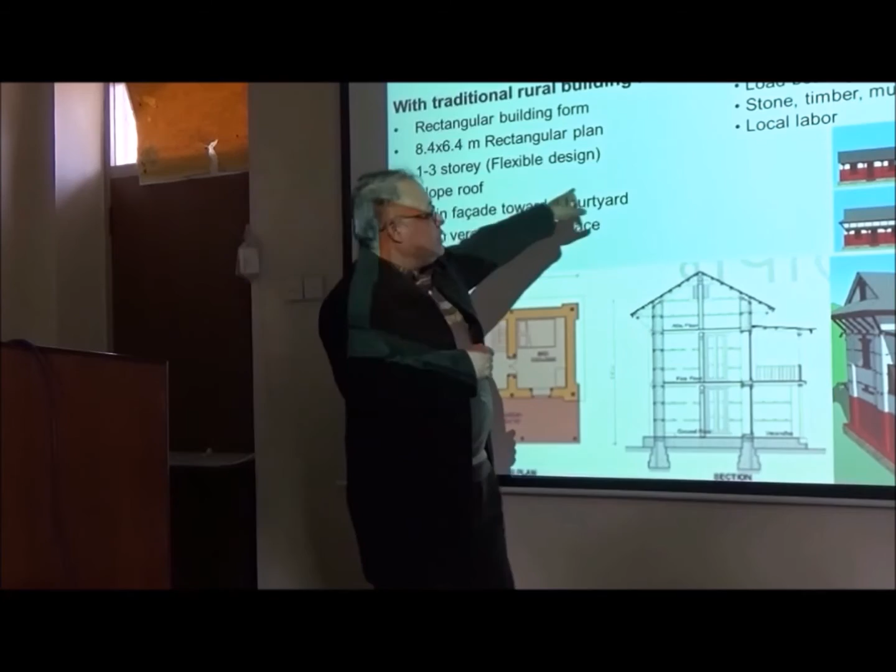They designed it flexibly. If people don't have money but need to live there, they can build 1 story. If they want 2 stories, they can design 2, maybe 3. This flexible design included technical details on how to design the section, ground floor, and all.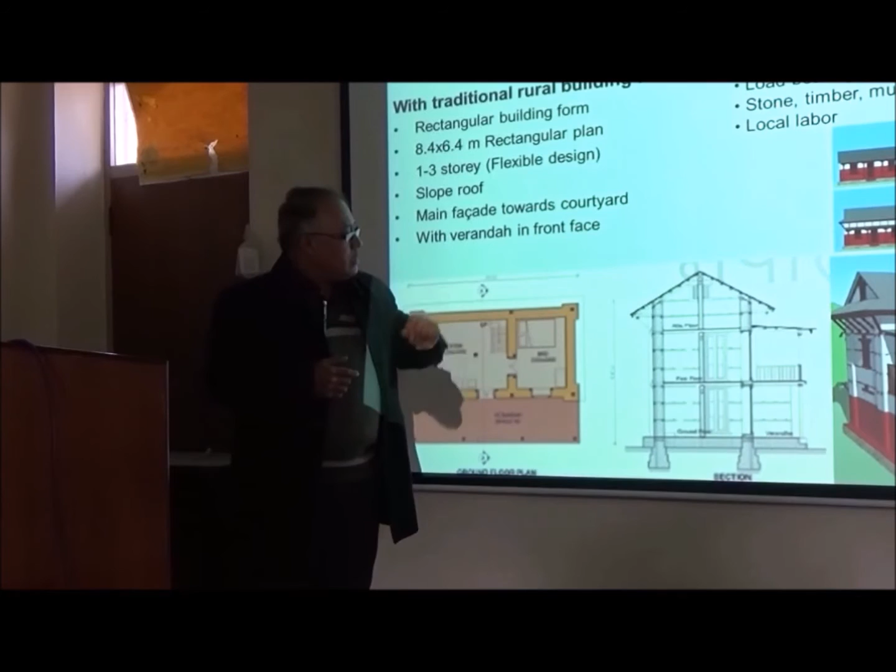It has a traditional look, with a slope roof and the main facade towards the courtyard, with a veranda - you can see the veranda over there.

In this building, they focused on how to minimize earthquake effects, designing with different systems including joint interlock bracing.

You can see in the first picture all these wooden ties used at sill level, lintel level, and floor level, creating a box effect for seismic resistance.

You can see there they have corner bracing too - a vertical wooden post in the wall that also ties with the sill, lintel.

and floor level to act as a single unit during earthquake. There is also a tie at the gable end, as you can see.

Many buildings collapsed only in the gable part. So they showed the ties - horizontal ties and vertical ties at different levels, using wooden material, so they don't need reinforcement bars.

People think that if you use only reinforcement bar, the building will be safe. That is not true - we can achieve this with local materials also.

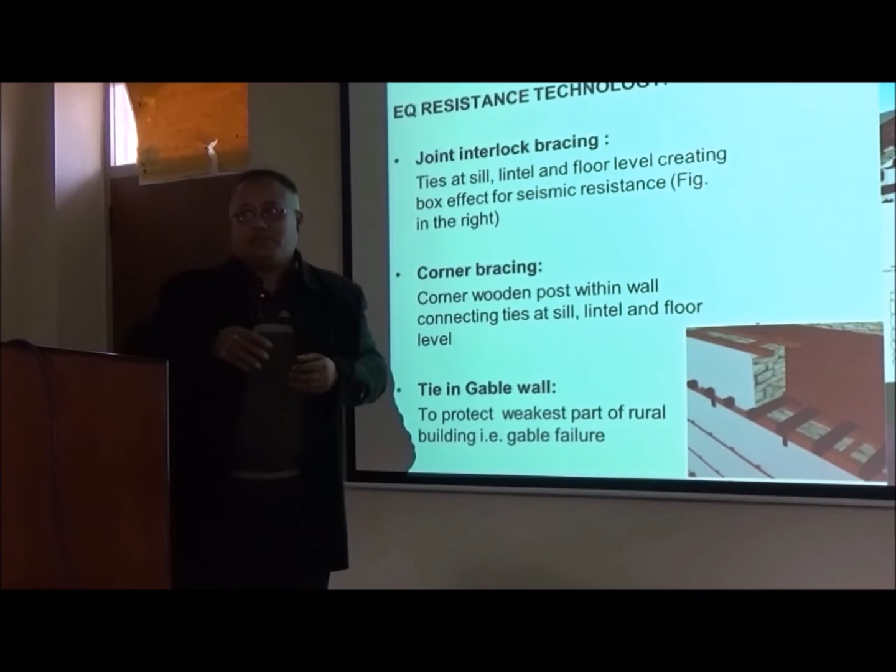They also calculated the cost. It's a little bit high because it's 3-story; it is a bit of a demo building.

People collected material - you can see stone for the foundation and wall from the landslide area after the earthquake. This building's total cost is 1,270,000 Nepalese rupees.

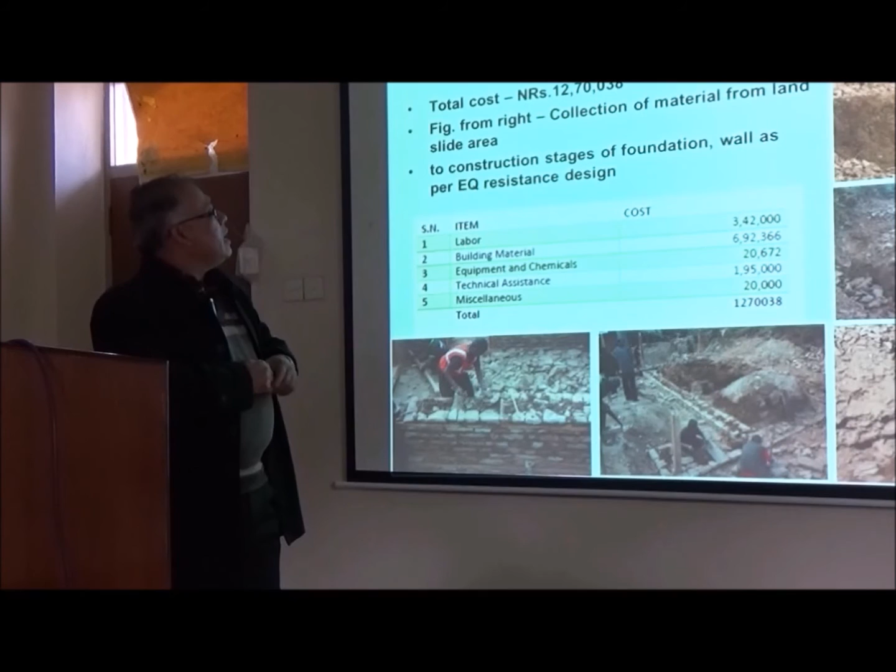You can see the different figures - this is the foundation trench, with the wooden post.

You see the foundation laying. After the foundation, after about 3 feet, they have a horizontal tie to reinforce this building for earthquake resistance.

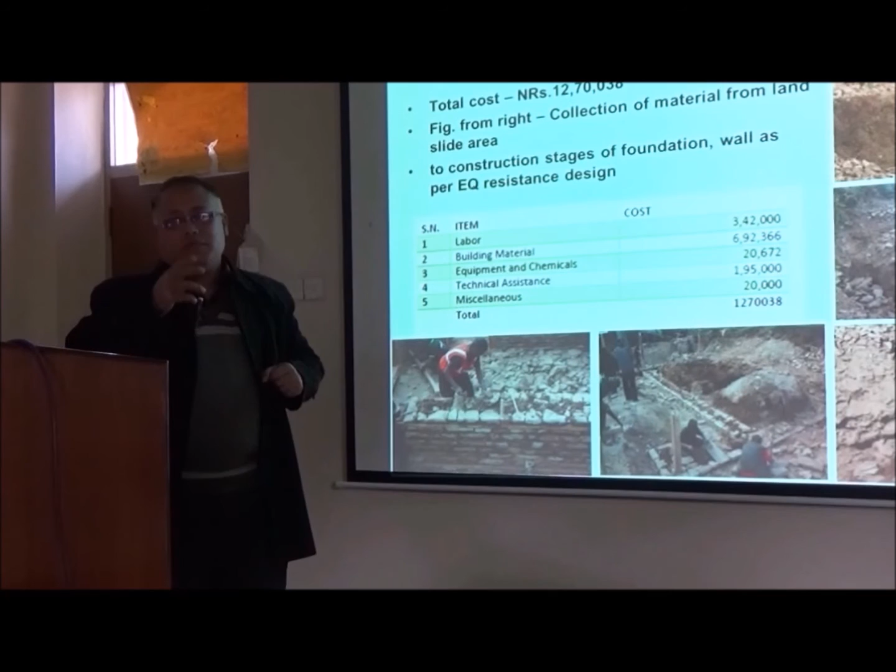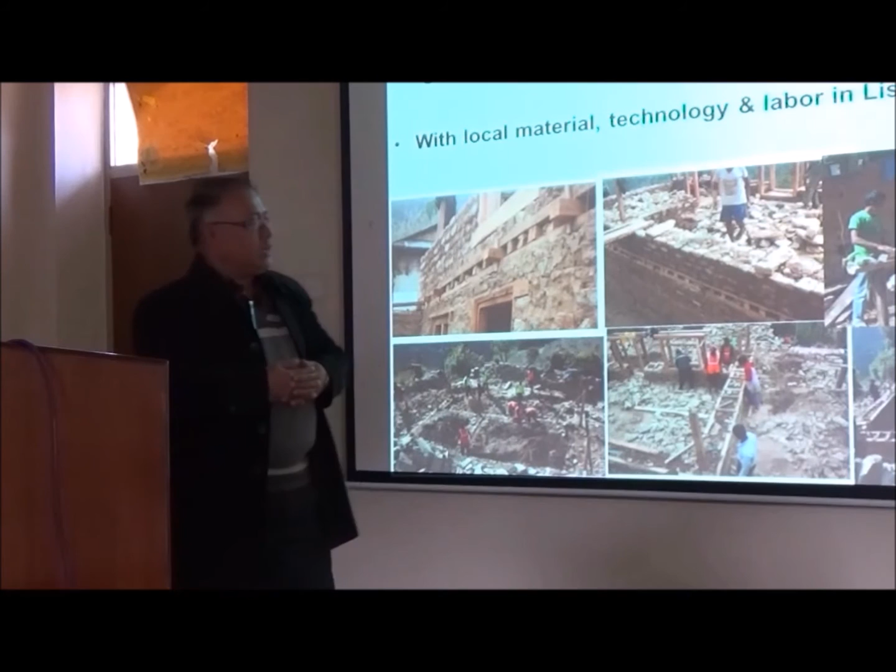You can see the local material, technology, and labor - local carpenters working, local masons working, and the house owner also working. Many people worked with this wooden bracing technology.

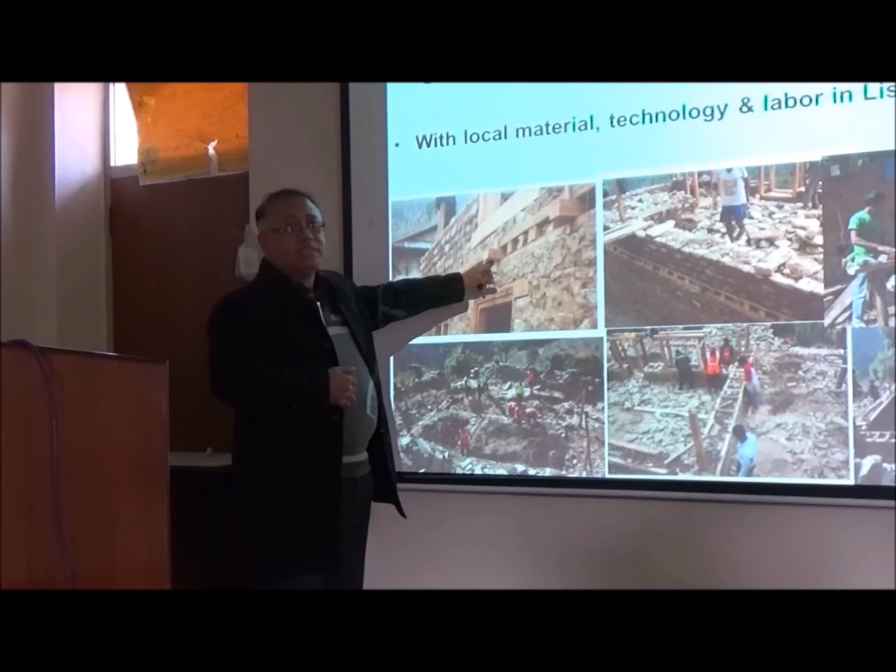You can see the same technology as the previous local technology being used here. This is the interior view, and that is the exterior view.

There is the team who worked here. So this is like the same as the traditional building.

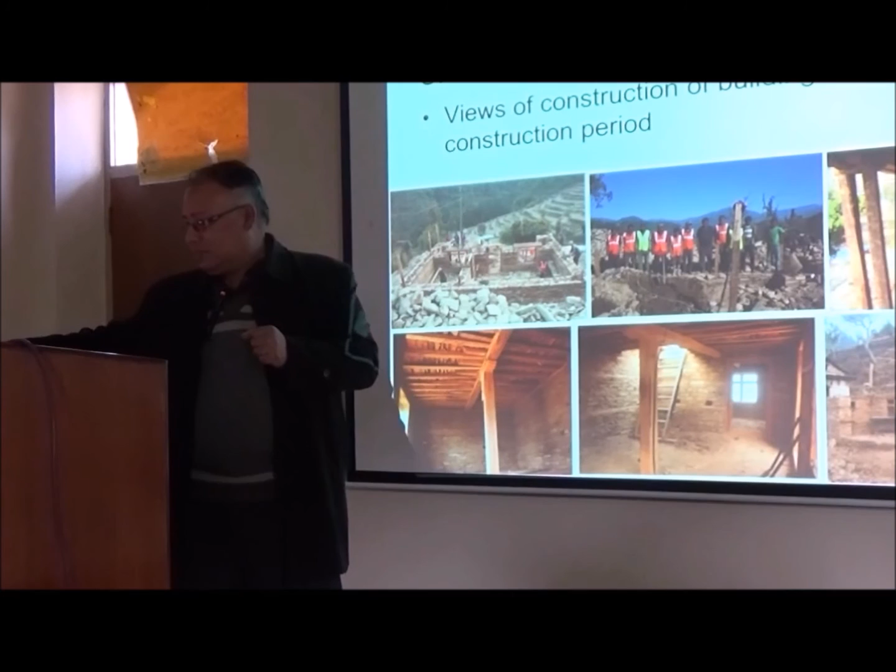So we can say that with the help of earthquake resistant building design and technology, we can design and construct safer rural houses. In the rural areas of Nepal in the future, vernacular buildings are not vulnerable.

If you design and construct them in a certain way, without considering earthquake impact, then they become vulnerable in the future.

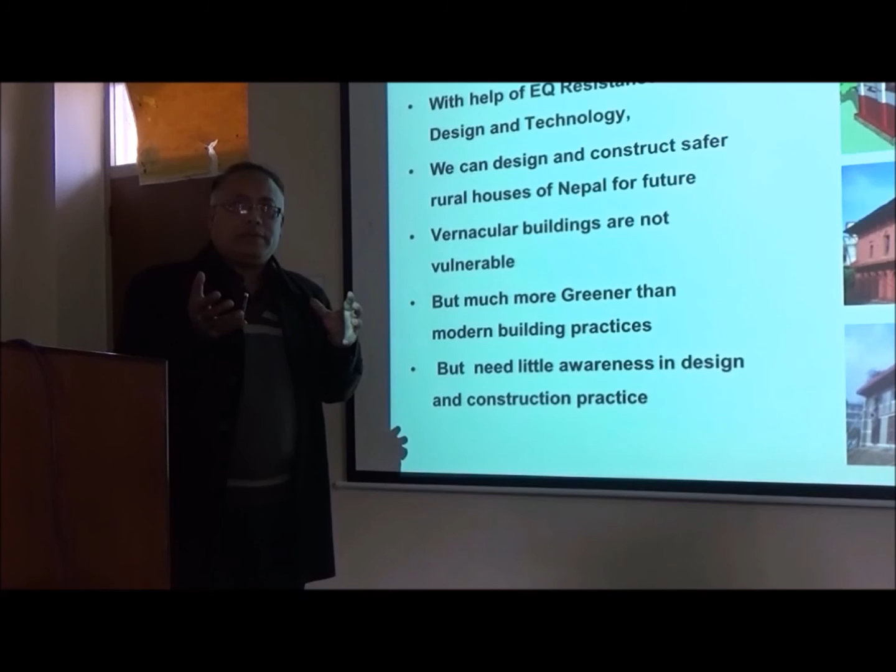This building is much greener, as already said, because it uses local material, local technology, and local labor - you don't need transportation from long distances. But when you design and construct this type of building, you need a little awareness in design and construction practice.

If you train people, show them the design and a three-dimensional figure, 3D, and show them on site, they can design and construct this building.

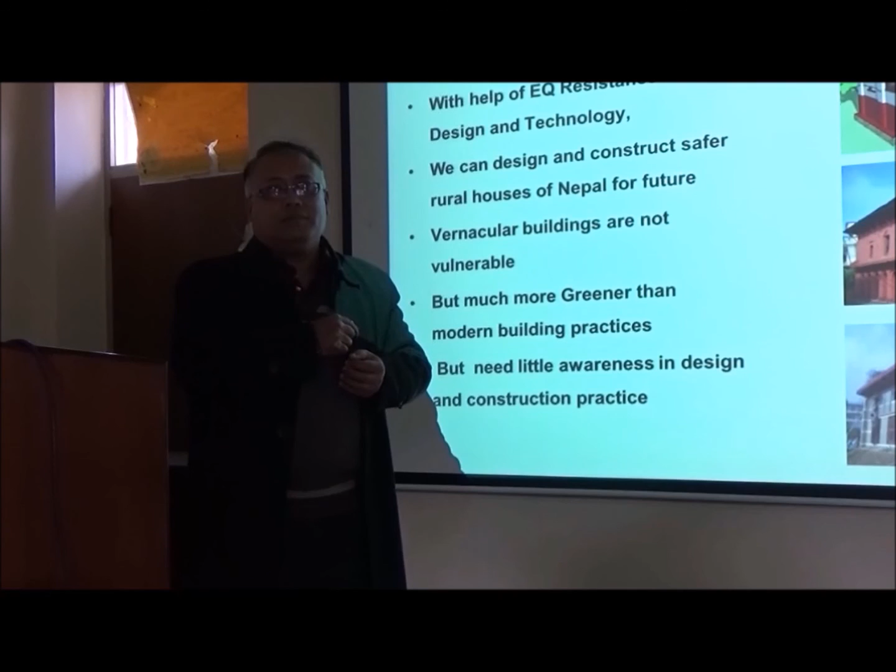And they can copy it. This is only one building, in this area. They haven't built many more, but this is the demo building - then they will see it and build another building.

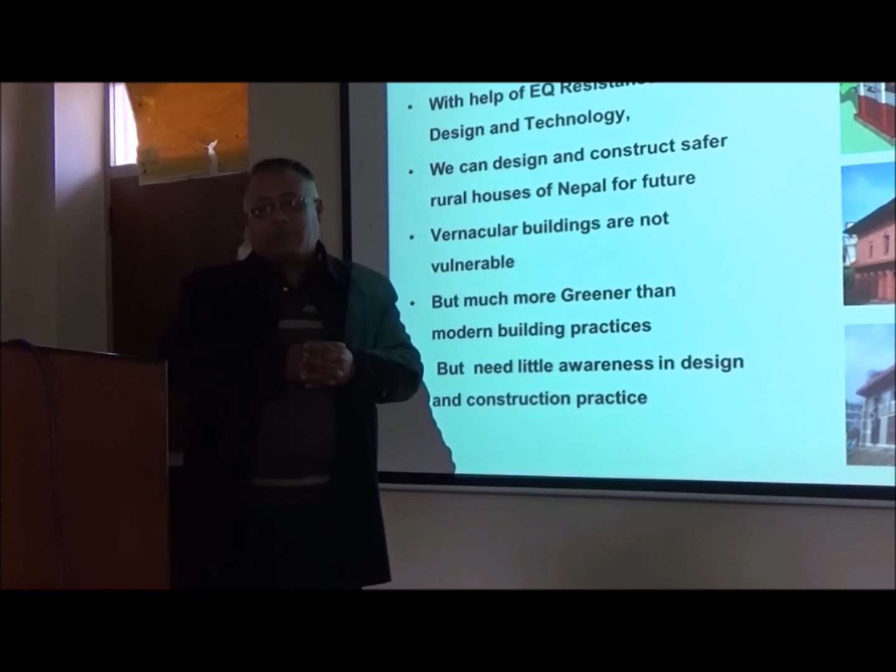So I can say this traditional building is still effective, still safer, still greener compared to modern buildings.